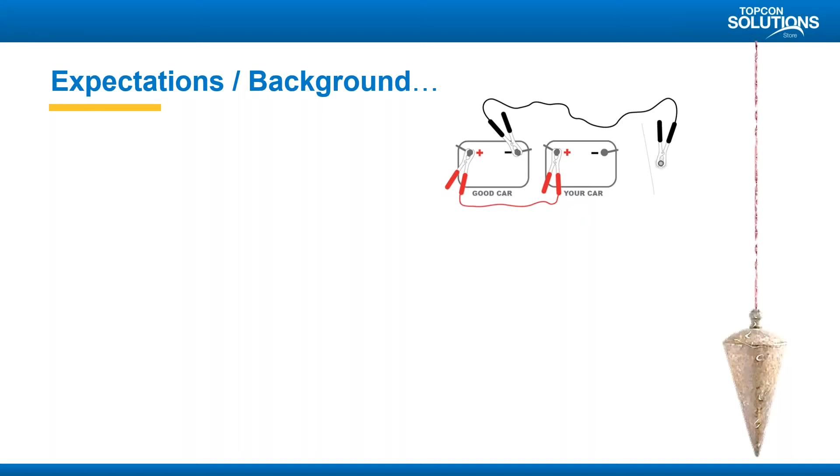Now, I set this up a little different, this whole Jumpstart series concept. I want to give a little background and some expectations on what we're going to be trying to achieve today. And right off the bat, why this Jumpstart series?

The main thing is, time is money, right? And a lot of folks that I speak with, they just don't have the time to sit in a class for 2, 3 days, whatever it may be, and they're really just trying to get some core settings in place to, I don't know, just make Civil 3D more usable and repeatable. That's really the key.

And another part of this too is with this new strange world that we're working in, many of us are working from home, and a lot of folks, they're still staying busy, but they may have a little extra time here and there to get a few things in place for when they do finally get a chance to get back in the office. So what we're going to be talking about today, I think I named this one something to the effect of 'under the hood,' sort of key settings and whatnot.

Now, I wanted to maybe preface before we got too deep into all of this that one size truly doesn't fit all when it comes to styles and templates and everything that falls under that category. Realistically, I've gone everywhere and worked with tons and tons of different folks, and I'll see that sometimes I'll have a process or two that I've picked up from folks or whatever, and I'll show it off, but it may just not work for them for whatever reason.

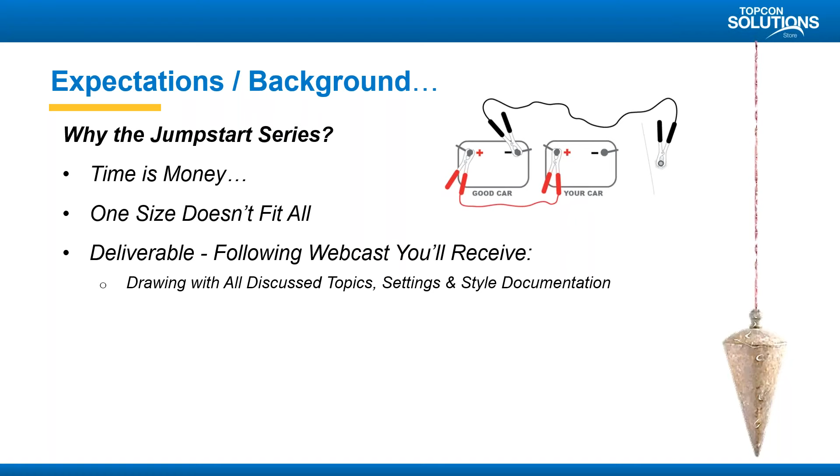You can kind of figure out what works best for you.

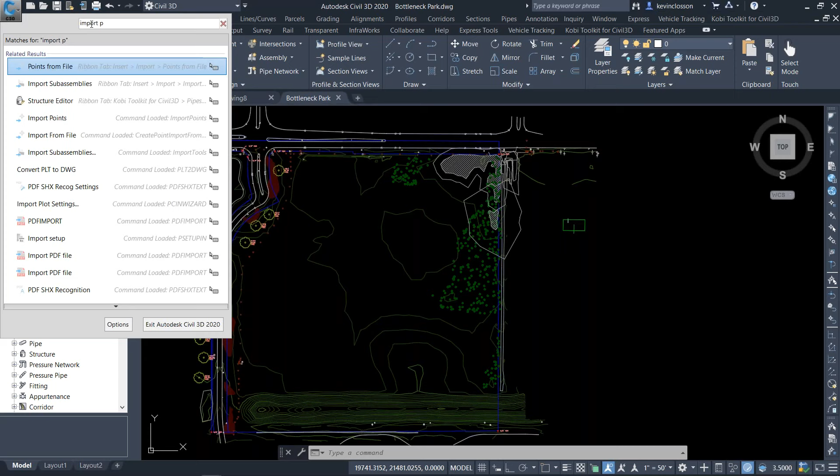But whatever that command may be - say you're trying to import points or something like that - you just start typing in 'import', and as soon as I go to 'points', lo and behold, there's Import Points.

So you can just direct access those commands. Kind of a nice little spot. Anyway, no big deal, I just thought I might hit that in passing.

Okay, so now what we're looking at is this one here, the quick access toolbar. And we use it all the time. That's where we open up a new drawing, save, undo, print, however you have it set up. But one thing I like to show with this is it's easily customizable.

In fact, I think this week I'll be working with somebody that had some old customizations, and we're going to decide whether or not they really want to migrate those customizations forward, because this slick little toolbar is so easy to customize.

And the second part is our ribbon, as you know, is context sensitive. So if you pick something, it serves up your next move. What I mean is if I click on that surface, it takes a second, but you'll see all of the next moves. The software behaves like a Word document. You pick on an image, there's a format for the image, or you pick on a piece of text or a table, and it changes around to the data associated with that.

So I say all that because I'm not seeing as much customization as I used to. And for those of you that do have a lot of customization, you know that sometimes bringing it forward or migrating it forward can create various scenarios that you end up having to repath things, what have you.

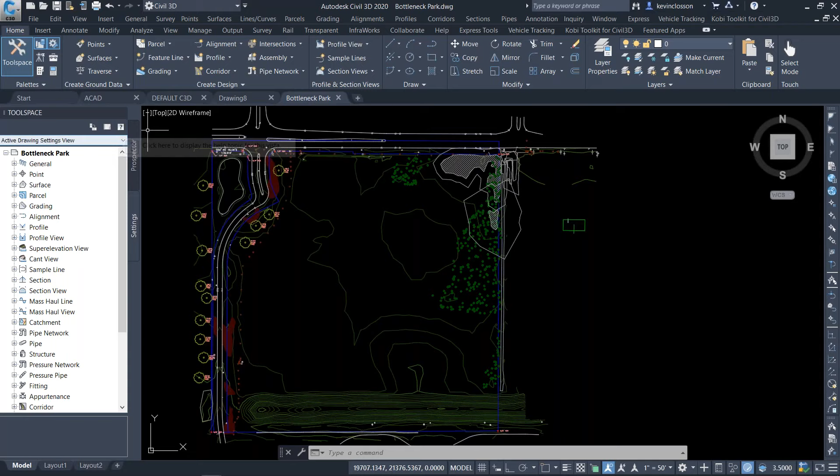So if I needed, a couple examples, a bearing and a distance, or information on an arc or something like that, if you're using the ribbon, that's where you would figure it out. Because I'm trying to analyze something, you'd switch to the Analyze tab, and then you'd slide over here and you'll see there's line arc information. Well, great, and you'd pick it, and it works fine.

But with this quick access toolbar, you can find any command that you need, and you can right-click on it, and the first option is add to the quick access toolbar, and it throws it right onto that toolbar. And I'll show you where we can make that stick too.

If I were to shut it down and come back in, or I were to crash or switch what they call workspaces, you may lose those settings. So there is a key setting in all of this. In fact, I'll point that out now, might as well.

This is our, if I drop that down, different workspaces. Looking through those, these are just default, there's 4 of them. Civil 3D, which is pretty much what we're always working in. Drafting and annotation is the AutoCAD portion, 2D AutoCAD. 3D modeling is three-dimensional AutoCAD, a little different drafting, more like parts, say on an engine. And then planning and analysis, that's the map portion, the GIS portion, Map 3D, that comes with Civil 3D. Now those are our workspaces.

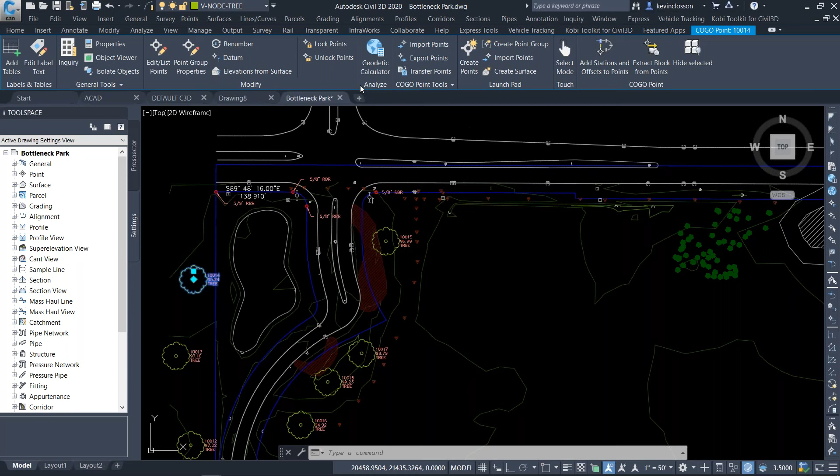So maybe a couple other quick things with this, just to be thorough. If I drop down that far right arrow pointing south, you'll see there's workspace, so I could always turn this back on if I wanted it up there rather than the little gear thing down here. But there's a few other little quick settings I want to show off, especially if you're newer to the program, or just don't get a chance to touch it day in and day out.

Toward the bottom here, the second one from the bottom, this is where it says currently—because mine's not on, actually mine is too on, I forgot to turn that off, sorry. Mine says hide menu bar.

By default, it'll look like this, where I'm just seeing a ribbon, okay? But if I drop that little arrow down, this is what I was suggesting, if you wanted those drop downs, you could say show the menu bar. And there we go, you can see file, edit, view, and so forth.

Now, the reason why I show that is, for those of you that just don't touch it day in and day out, I think it gives you a really good working relationship with the program. You don't have to jump to the ribbon to know where everything's at all the time.

An example would be if I'm just trying to simply insert points, well, I have to know that I've got to go to my ribbon, and then there's points from a file. And a couple different ways to do it too—you can use the survey database, and that's a whole nother ball of wax. We'll be doing that next session. But that's very doable, okay.

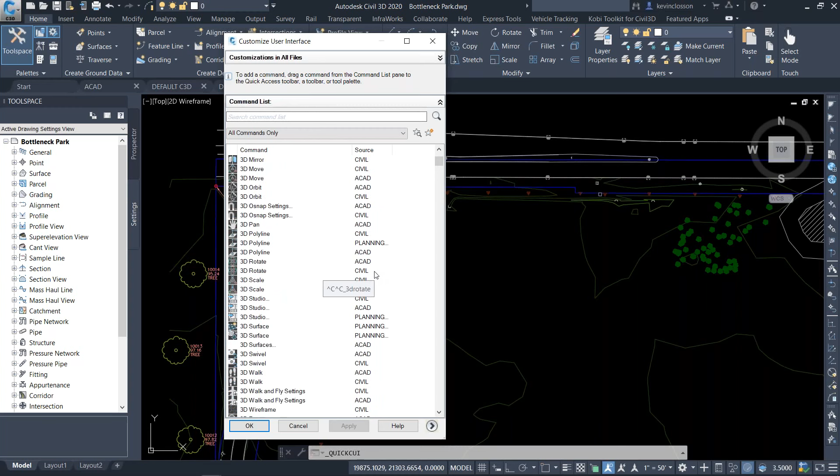This is every command within the program, whether it's civil, AutoCAD, map related, planning and analysis, and so forth, organized in that second column. Fortunately they are organized alphabetically, so you can go pick those. I'm just going to randomly grab something here.

Here's 3D Polyline—I wouldn't grab this one, but just since I'm looking at it, what you do is click and hold with your left mouse button, keeping my finger on that button, and you can see how the cursor looks kind of funky, like a little box with a plus. I can actually take that and place it anywhere I want, so maybe I'll put it right here for whatever reason.

You'll see now that by dragging that up, there it is, and it will stay there until I either get rid of it, or if I didn't have my workspace settings saved, next time I came in it would disappear. So maybe you have a job where you're doing areas, and you might find that area button and drag it onto the toolbar—just that day you're doing a lot of different areas, so it might be nice to have it readily available.

And now, when you already saw me do this, but if I don't want that, I'll discard that. If I don't want that, I can just right click on it and remove it from the quick access toolbar.

It really is bulletproof, customization-wise, throughout the years. I still run into it periodically where you'll come in one day and all of your toolbars or whatever they are - years ago it was smiley faces, then it became question marks - and you have to load one of the MNU files, repath a few things, and possibly the little pictures and everything else to get that information back. This thing you can add, remove, whatever it may be, all the time. So I'll dump that one.

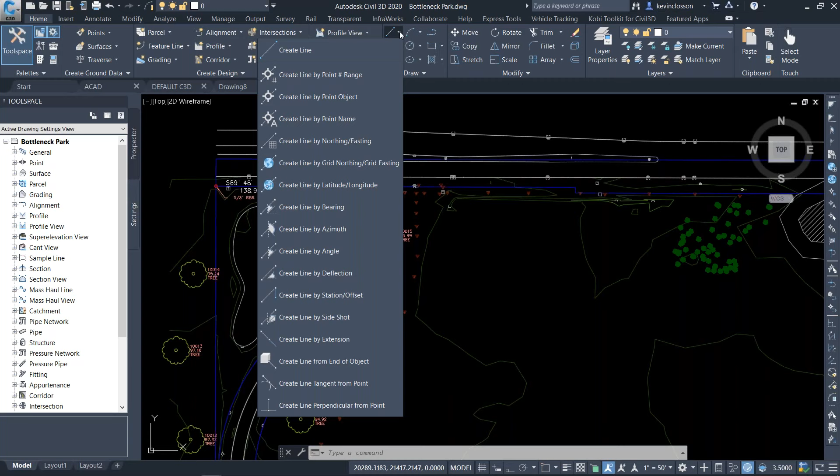These are all of the different AutoCAD lines - different ways to create lines, 3D, whatever they are. You can see the list there, a great big long drop down list. I'm just going to use that one as a default. I'd never add this one, but I think it shows what I'm trying to convey here. By simply clicking on it and selecting add to the quick access toolbar, there's that drop down list. If I click on it, they're all there regardless of what workspace I'm in - they'll always be right there.

Like I said, I've gone in and in the past set some default survey stuff up, like importing points, or just whatever commands folks didn't want to have to jump back and forth between different tabs on the ribbon to get to. You can compile whatever you want in that list, and that helps with additional real estate. At the end I can simply remove the quick access toolbar and poof, it's gone. But I will leave up that layer thing - that's one of probably my favorite things in the last 10 years that they've allowed us to do. It's quite useful.

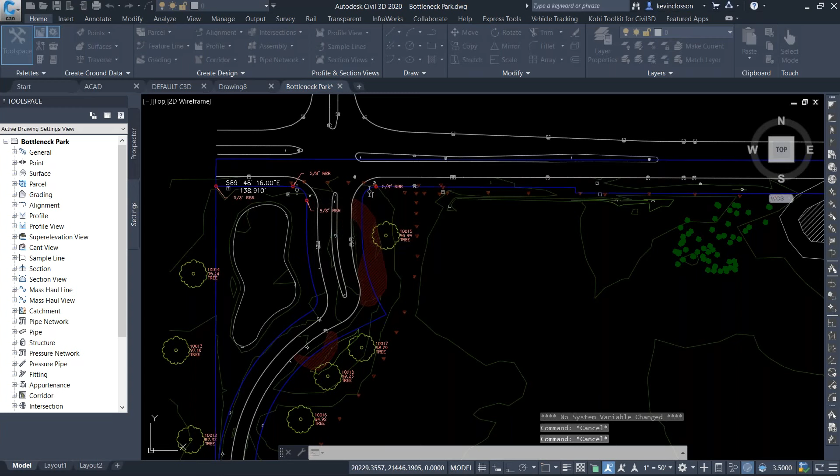Okay, so moving into the tasks at hand here. I'm going to get rid of that drawing for now. And I want to talk a little bit about template theory.

What I mean by that is, how do we want to run it? There are infinite ways that you can set your template up and behave with your day-to-day drafting or your outputs, whatever it may be. I'm contacted all the time to take a look at it, possibly overhaul a template, build it from scratch, whatever it is. I thought, as a point of reference, we'd backtrack a little bit and I'll give you a feel for what I look for. There's a couple of key settings that I look for, and that's what today is about - analyzing what you have currently and then making these changes.

I prefer to run the template lean and mean. I don't want a ton of layers. I really like automation, so if I go to create an entity, that's when the layers get created, and I'll show some examples of that. It really streamlines the process.

And the settings within those styles also allow us that holistic flexibility I was talking about, viewport to viewport - that's what we're talking about today. I don't want to make any of this complicated. None of this is rocket science - it's just a repetitive process. But knowing what you're looking for and how you want to run it, that's key.

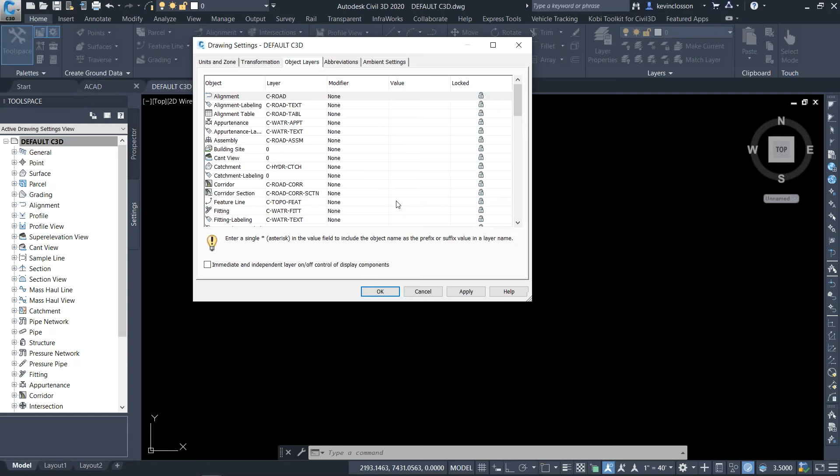But what I don't see are these things that we call modifiers. This is one spot that I look for. Now, I'm surely not trying to pat myself on the back by any means, I just grabbed this template.

Here's one that you'll be receiving here in just a bit. Drawing8, I just left it at that, we could save its name, whatever. And if I edit the drawing settings on this one, when I start seeing this is when I know that people are digging into their template and they're actually trying to streamline processes and just make the program as a whole easier to use.

You can see the same exact settings, but this is using National CAD standards, so the alignment is C-align, but where it differs from the last one is the suffix. And these are incredibly simple. You just click on it, drop it down, and you either change it to prefix, suffix, or as we've already seen prior, they were all set to none.

What that does is, with a suffix, you can then add in a value. If I stayed with the formatting in the National CAD standards, they're using C as the callout, which is C for civil, V for survey, and then it's utilizing a dash, and then it's just the actual entity itself. ALGN is for alignment, and then it's just a series of whatever your format is, dash, then 4 letters, 4 letters, 4 letters.

And for those of you that know me, I'm surely not a conformist by any means. The National CAD standards, even though it's got that spooky name, it's not an exact science, other than those first 2 callouts, the discipline and then the entity. After that, you could put whatever you want in there if you wanted to, but if you wanted to stay in the National CAD standards realm, you would say dash and then 4 letters, dash, 4 letters, dash, 4 letters.

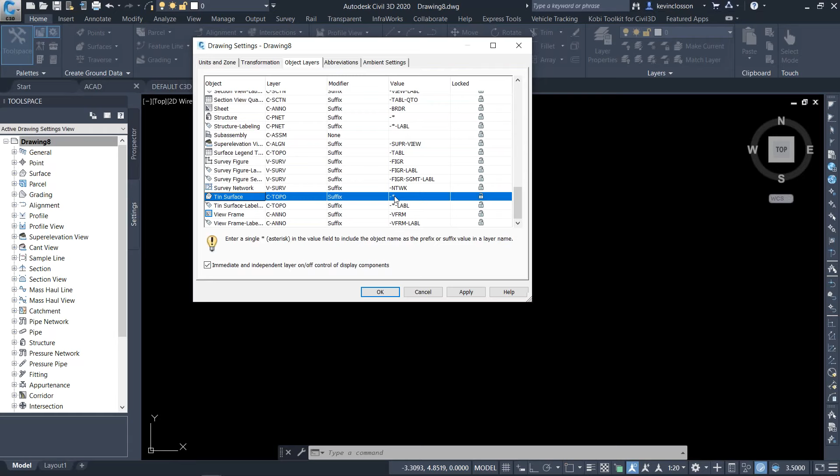There is no mapping that takes place, we don't have to do anything. Once we have this set up accordingly, if we created a surface and named that surface EG, that little dash in the wildcard or the asterisk will steal the name of the surface. So if we called it EG, we'd have a brand new layer automated at time of creation for that new surface - it would go C-topo-EG. If we created a pond and named that surface pond, it would go C-topo-pond. So it's being created as we go, in essence on the fly.

Now, a couple other things I look for, and I'll go back to this - the Civil 3D default template. Another thing I look for is layer counts.

So the default template, without drawing anything, has 212 layers. I think the other ones have 211 - I may have drawn something, I don't know. But that's not a ton of layers by any means. That is quite a few though.

It depends on if you have point styles in there and how you want to organize those - that's some of the stuff we'll be looking at later. But before we've drawn anything, this one has 212 layers. That's not horrendous by any means, but I've ran into some where I was reviewing templates, up in Alaska, and I ran into one that had almost 2,500 layers at startup without drawing a lick. Nothing was drawn. So they spent a bulk of their time chasing layers.

And there's different ways to organize that. You can have a secondary template and drag in layers via that design center we talked about. A good example might be a landscape architect who has a whole series of layers they use, but they're not really associated to Civil 3D - they're just AutoCAD layers, so to speak. So I'll often create a second drawing that we can drag those layers in with all those predefined output settings, line types, colors, and that kind of thing. I'll show that later when we're talking Design Center. But that's a great way to get layer counts down.

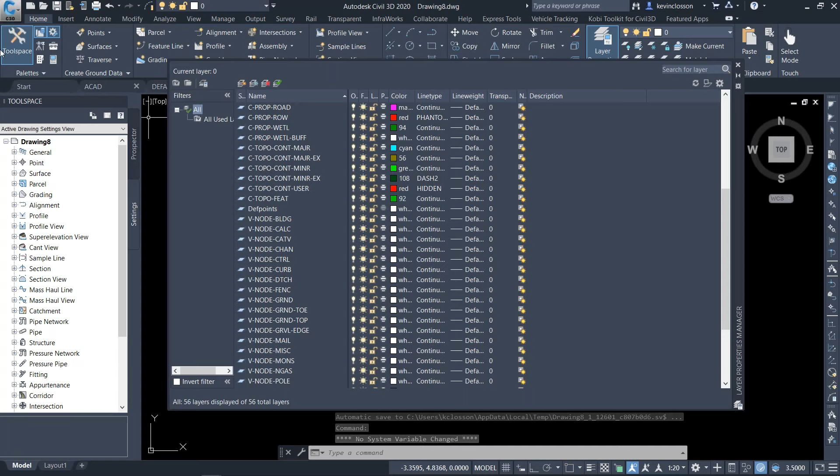Now, as I'm talking about all of these - thanks for hanging in there, this isn't the most exciting stuff - another thing I look at when reviewing these templates is what I often refer to as layer bloat, where there's several needless layers just by default. And like I said, one size doesn't fit all, so you may have a reason that you want to have it. But here's a good example where I shave a lot of layers down.

So if I go to the default Civil 3D template that comes with the program, I'll often show this one here, the surface style - here's surface styles. If I expand that out, I'll just grab any one of these randomly. This is contours 1 and 5, I think they call them design and background, something like that. So on the display tab, as you know, these are those sub-component layers, okay?

And at least these are flexible. You can see, for instance, here's major contours - they're on a layer that's predefined in the template, C topo major new, and whatever that colors to is kind of greenish, but that's set at that layer level. So at least that's a good thing - we do have some flexibility with it.

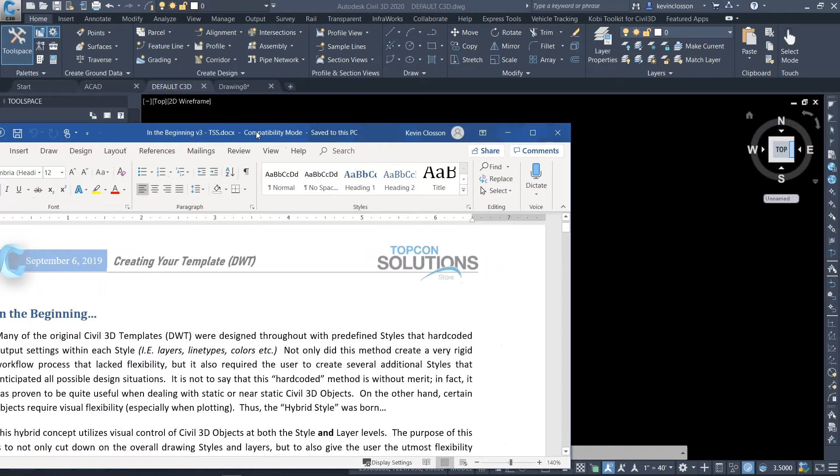So what do I mean by all of this? Let me pop up a document here, and I'm going to send this one on to you as well. I often make fun of myself with this—it is a little on the boring side. I was joking around here in the beginning.

Years ago I put this together for a firm. They had me build an incredibly elaborate template for them, and they were just getting up to speed in Civil 3D, and they didn't know how to use the template. They just hadn't had the experience with Civil 3D as a whole—they just didn't know how to use it. So I wrote this document up, and I homogenized it some so it sort of fits everybody. I've been threatening to change a word or two here, but not to bore you with it.

I give a little preface before I get too deep into this thing: basically there's 3 types of styles templates, and you see those bullet points there. I called it style controlled, object layer controlled, or a hybrid possibly of both.

Years ago now, when they handed us the box of Civil 3D and said install it, we're going to be using this one day, we were trying to do this thing called style controlled. This document has examples, and we'll get down there in a little bit. Here's style controlled—I'll show it, a little dialog box here. What it's saying is inside of here, you'll see there's line, curve, spiral. When that alignment gets drawn, it's going to automatically put those on a layer called C road center, in this case N for new. But it's hard coded here where it says color is green.

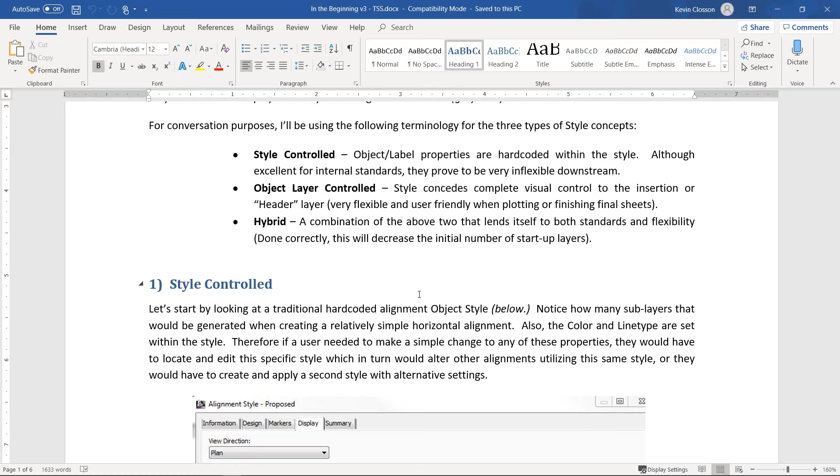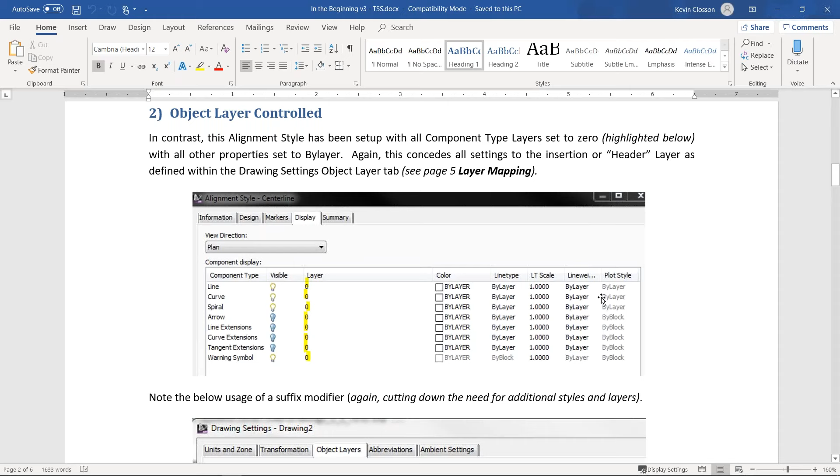You might not do it with an alignment, but I may show that. So that whole concept with that style controlled, it's excellent for maintaining standards, but flexibility becomes a problem. The next one down is object layer controlled. If I go down to this picture, this is looking at that same alignment. In this case, notice that everything is set to 0. So with those layers mapped accordingly, one of the first things I go look at in the drawing settings under object layers, if I create an alignment, this one is going to go C-align, and then the suffix is being utilized with that dash and an asterisk. So if we were to call this main road, the layer will get created C-align main. Now, if there's a con to this, it'll initially come in white, but because of these settings up here, all I'd have to do...

Uh-oh, it looks like maybe we lost Kevin's audio. Audio connection restored. Good, there we go. All right, Kevin's back. How long was I gone? Oh, a good 30 seconds or better.

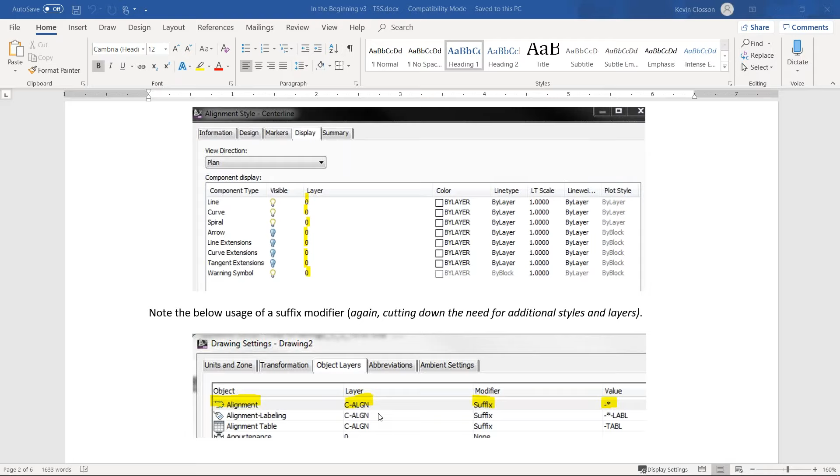Quickly, what I was just saying is those settings down here are going to automatically work because we have the automation of layers. By default, I create a new alignment, name it main road or something like that, and it'll go C-align main. I just would go to that layer and change it there. Where this is a game changer on the pipes side of things is I can have all my pipes do this as well. Instead of having tons and tons of layers within my pipes, if they're all set to 0, it'll automatically go to whatever I call that pipe run or pipe network. If I call it storm, it would say something like C-pnet pipe network dash storm or sewer or whatever it is. So it's this really easy way to manipulate that data after the fact.

And then the last one, and I'll put this in motion for us here, is the hybrid, which over the years we started kind of playing with. There are some layers that you're going to want in your styles template. I mentioned surfaces - I always want to have existing surface contours and proposed surface contours, I want layers to represent those from the start. That way, if I come to work for you tomorrow and you say build these surfaces, all I have to do is apply your style and it's always going to plot, and we have that consistency. However, because it gets its style or output from the layer itself, since everything is set to by layer, we can do whatever we want with it.

So, fair enough. Now there's a neat thing, and you'll receive this too, and I'll put that into motion, and as we start playing with the points, I'm going to come back to this to hopefully solidify what I'm talking about. So in this drawing here, this is the template, if you will, that I'm going to send out to you. And quick point of reference here, I'll do something like this.

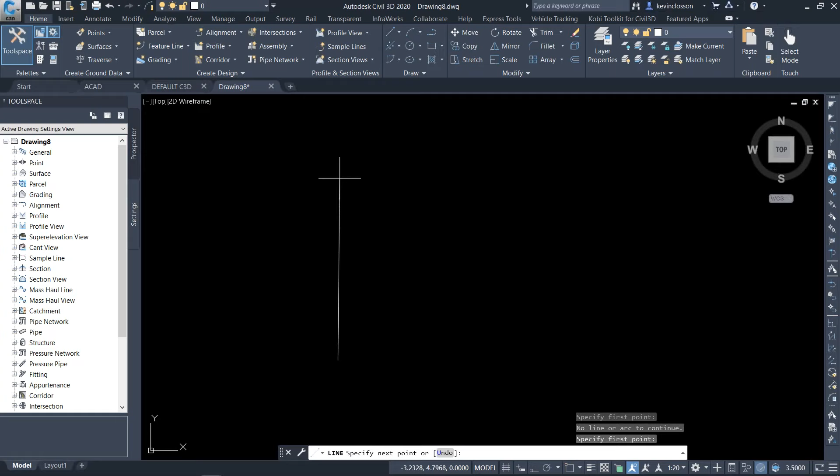Quick zoom extents here. I think I'll move that so we're not in negative values.

Fair enough. All right, different ways I can create this. Maybe I'll scoot over here a little bit. I just needed some kind of feel for what we were looking at here. So I'm using alignments, but this could be pipe networks, or whatever it may be. And when we looked at the layers, I think we roughly said there was 56 of them in here, something like that. Now, if I go to alignment and say alignment creation tools, I'll just create a quick alignment, and use that example I was talking about earlier, and say this is like the main road or something like that.

Center line, fair enough, doesn't matter with any of this. And then the alignment styles, if I drop this down, there's one in particular that I'm talking about. I do have, for the record, existing and proposed inside here. So when I initially put this template together, it was for a firm that had some folks that some were better users than others, and so they wanted a foolproof method. If this was a proposed alignment, we could pick proposed, and we sort of did. We hard coded those. In fact, let me grab that proposed one for a second and peek inside of it so you can see what I'm talking about.

So in this case, we still left the layers zeroed out, okay? But in their case, they needed the color always to be blue. We didn't mess with the line types. We said that could still be adjusted via the layer itself. So this was just, like I said, sort of a foolproof way. If somebody drew an alignment, it would always be blue. However, when we create this, it's going to call it C-align-

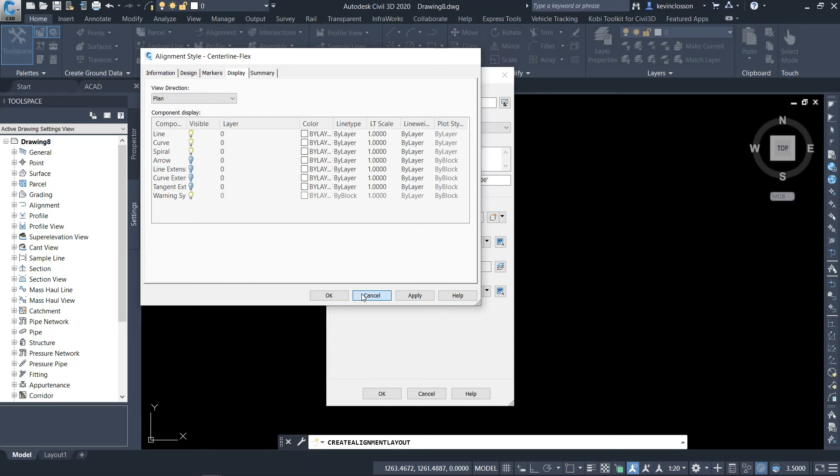main, the name of the road. Now this other one that I use throughout the program for various reasons, I started referring to it as flex, for flexible. And if we took a quick peek inside of that one, notice that everything's still zeroed out. Colors are by layer, line types are by layer, and so forth. So I'm going to just use that one, and then I'll quickly draw this thing out, whatever the labels are, and say okay to this. And as you know, we'll just say, I don't know, tangents, no curves. I'll just throw something in here real quick.

Now, if there's a drawback to this method, whether it be alignments, pipes, or different things like that, notice that it does come in all white, okay? And this is just a default setting. That's just a font that's using this a little bit more bold. Now if it's a one-time setting, you would have to have your team - and I'm not saying you have to do it this way by any means. This is just a method that a lot of people like.

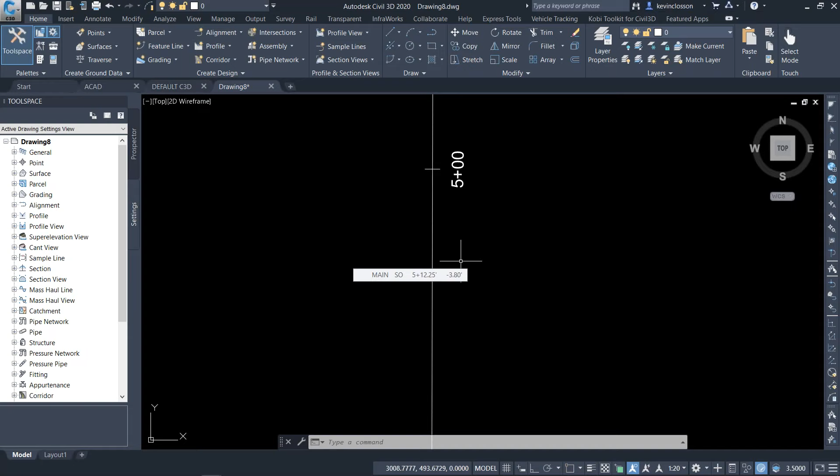Okay, I just wanted you to see this option, and it really lends itself to some of the other things we're going to do. So if this is a method and you have a team that's diligent enough to make sure that their proposed alignments are a certain color and line types and so forth, that's where we can go into our layers. And in this case, this didn't exist. So that's due to the automation, C-align-main. Perfect. So that was created.

Now there's a secondary piece here that we discovered as well. Notice directly underneath it, and I'll go back to that setting and show it off. Actually, I think I can use this here, drag this over here for a second. So here's sort of this byproduct that we discovered as well, or another little feature. Under that alignment, there's those settings back in the drawing settings, and this is a one-time deal. Obviously, we want this built into your template, so you don't always have to do this.

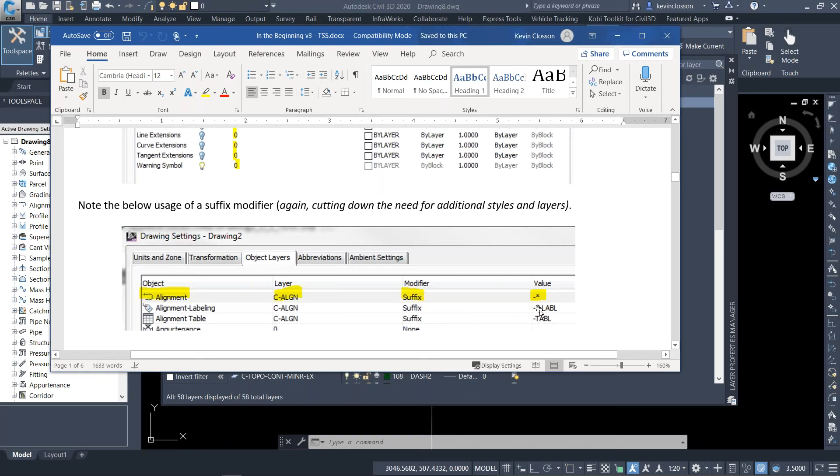But directly underneath it, where it says alignment labeling, that's also C-align. There's a suffix there. We utilize the suffix, and then what we did is we put a dash, an asterisk, dash, and then the National CAD Standard label. So the label's on layer 02, and what it does - well, as it gets created, but due to the insertion layer - so I'll start here with the main road. I don't know, pick your color, whatever your poison is here. I'll say yellow, and maybe I'll say the line type is center line.

So if I move this out of the way, you'll see that it now has that center line type and it's yellow, one-time setting, okay? Now I mentioned byproduct. Here's the real byproduct I wanted to show, is both of those got created as I created it. This is huge in pipe networks, but it also groups my alignments together.

I mentioned that template that had 2,400, not styles, but layers in it. They'd have to go way up to the top for their alignments, and then two-thirds of the way down to try to find the appropriate labels for it. And they were chasing layers all the time. These are all grouped nicely together.

So just to be obnoxious here, to change the color, I'll change that label to magenta. And if I get rid of that for a second, you'll see that now we have a yellow line type.

Now I don't want to oversell this though. Obviously you'd have to have a team that could adhere to standards. If, and you know who you are, if there's some folks that are kind of doing everything on their own, this might not be the best technique.

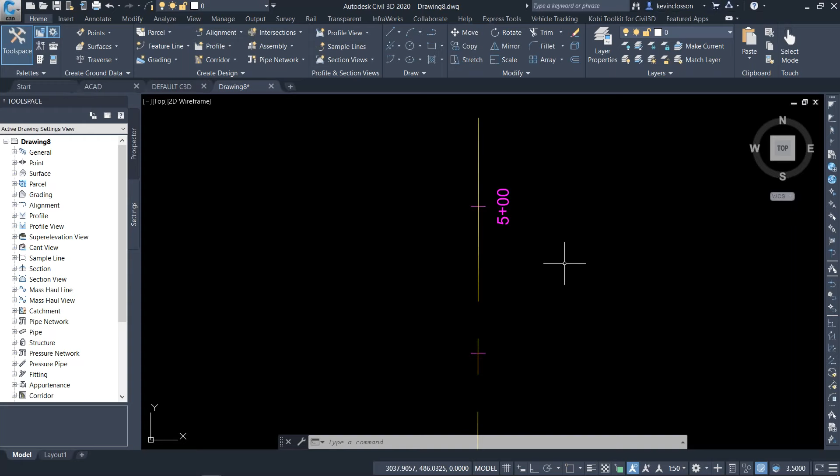Now the reason why I show this briefly, and I don't have anything set up in here, I'll kind of mock another one in here. I'll say alignment creation tool, same thing, and maybe this is the side road. And I'll slide on down here and I'll use that same style. I'll say that centerline flex, same labels, whatever.

And we'll pretend that this does something like a T intersection or something like that. And I'll just kind of rough it in, whatever, just close. And again, it starts its life in kind of a generic state. There's a couple other little tweaks we could do to it. We could have a line type automatically, though the line type is probably not going to change. But I love this aspect of it, that everything is grouped together.

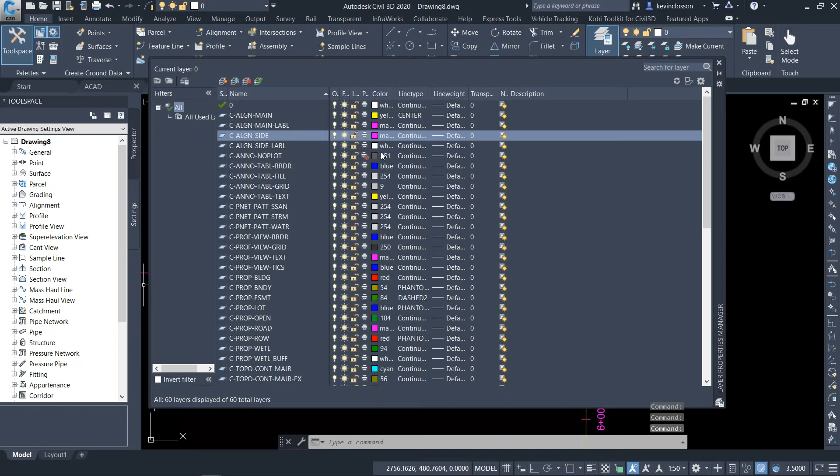So there's that alignment, that's the second one. I'll just change it to something different, this is the side road. I'll just make that magenta for kicks. I'm not concerned about the text, that's all just style stuff.

Now the reason why I'm promoting this, I guess, is, and here's where I don't really have anything set up. This is just a layout here. And if I were to throw in a couple viewports or something like that, I'll just copy that over.

You shouldn't copy those. Yeah, it doesn't matter.

All right, so I'll go into this one, I'll do like a zoom extents. And now with styles, and this is where you get into whatever the style may be, we can set the overall text height of the style regardless of the scale.

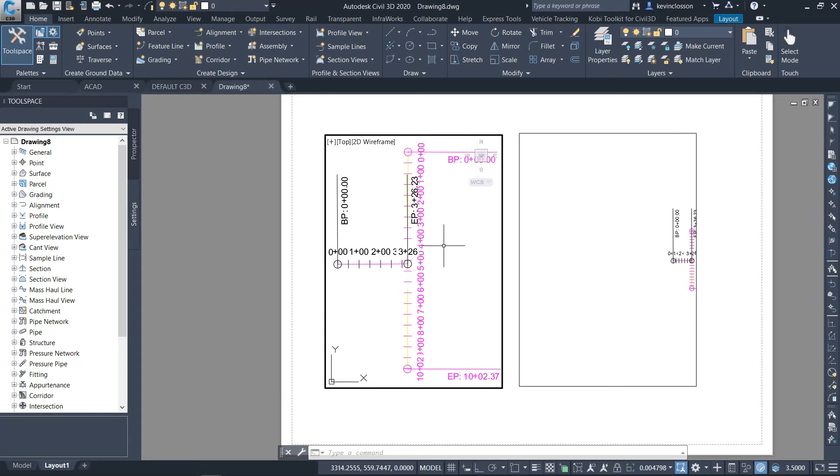This again, I don't have anything set up for this. So if I'm inside that viewport, I'm actually in model space and I can zoom in and it appears that everything's getting gigantic, and it is, it's just zooming in. But if I regen it, just do a quick REA, all that text is going to go down to its normal size. And I believe, if I'm not mistaken, that is 0.10 text height.

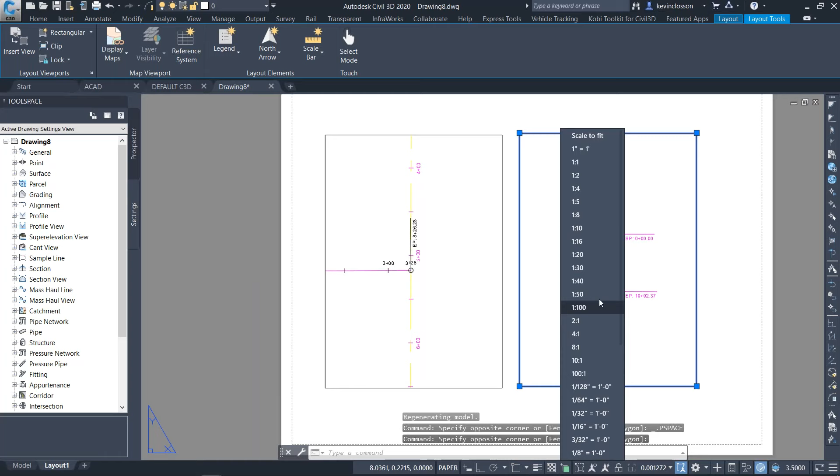So that was just a random scale, maybe we're zooming in on an intersection. If I go into this one, and I'll have to test it, I just drew that out of the blue. If I select it, maybe we want this one to be, let's see what 1 to 50 looks like. Oh, a little too much.

How about we'll say, we'll go 1 to 20. Oop, I went the wrong way. 1 to 100.

Now that one, regardless of my paper space scale, that doesn't matter. I can go inside this thing, move it, and then regen it. And due to styles, it automatically sets the text height, again, whatever I plot this at, the viewports are going to dictate the text height, whether it be a point or an alignment or a label on a surface, whatever, okay?

Now lastly, and here's where I'm going with all this, I'm trying to, this long drawn out process here, I'm trying to show the flexibility, right?

So inside of here, if I hover over that, you can see that they are linked. It's the same alignment. But being that I'm in the secondary one here, I can go into the layer properties, and I'll move this out of the way so we can see what we're talking about here.

I'm going to change that side road, which is currently, here's the side road. The global setting is magenta. Now I'm using an alignment. You may not do it here, but I think it's easy to understand what I'm talking about utilizing alignments. But if this was a pipe network or whatever it may be, surfaces, specific details within a surface, a major contour, who knows.

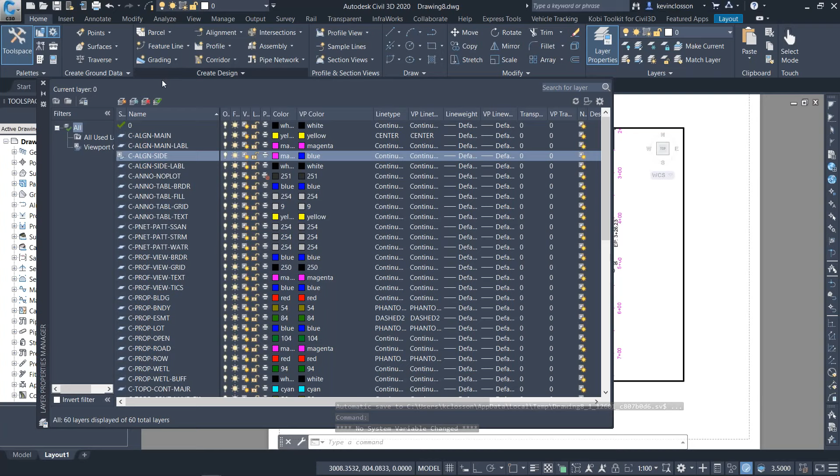And if we look at that, now you can see that, let me get out of it so I can zoom in a bit. There it goes. I don't know if you can quite make that out, but that's blue, still the same thing. And if I go back to my model space, it didn't change it. So anywhere that was in the drawing, it's only changing it in that viewport. And that's because we gave control to that layer, okay.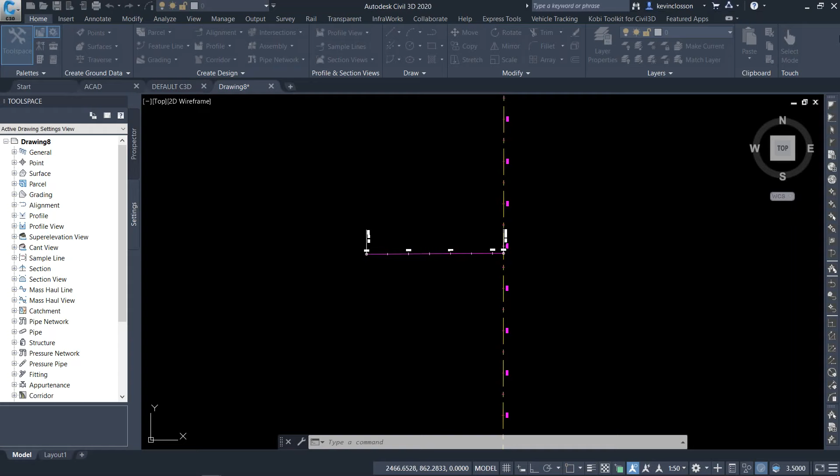So a couple more things, and let's start talking points. And forgive me, I'm just going to use one of my current drawings that we'll often use in class here.

And this one I just called description key, okay, the drawing itself. And what's inside of this is what we want to make sure that we have in place on your template. There's going to be a few things, okay. So on my settings tab, if I slide on down to points and I take a look at these description key sets, and this is an old file.

I love getting a chance to use it. So anytime I can pull it out, it makes me happy. This is one of the old Autodesk files that goes way, way back. You've probably seen it, and I left it as Portsmouth.

And if I just kind of do a quick tally of what's inside this drawing, if I right click on that and go into edit keys on this, I kept it really, really simple on purpose for, I guess, sort of a classroom or conveying the message. This is a real job back east, and this is just the description key file, okay.

And when we take a look at the drawing I'm going to send you, I've sort of homogenized it and made it a little bit easier to see, because everyone's raw descriptions, the description they record in the field, that's going to be different from drawing to drawing, firm to firm, agency to agency. So we'll take a look at that.

In this case, this is a very rural setting out there, and they got ground shots, iron pins. They don't have a lot because it's raw land. It was a subdivision that went in. So I just created a key for POW.

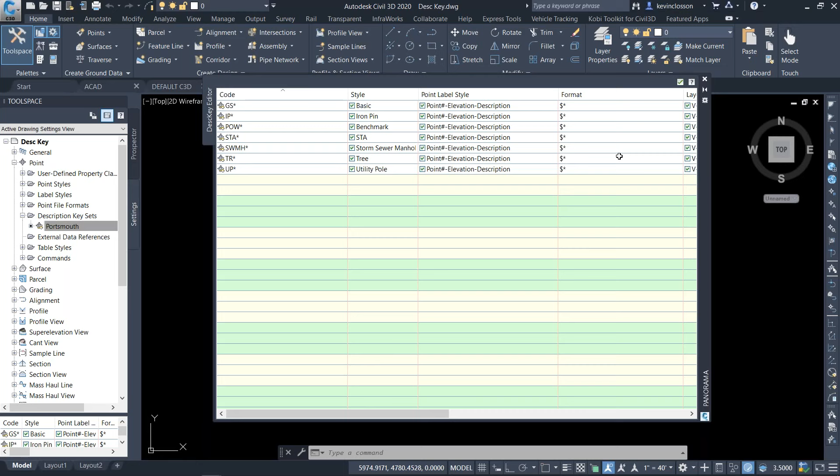The $ asterisk is nothing more than code that says steal whatever you punched in the data collector and in the field. Data collection systems have changed a bit too though. In the past we used to have to enter in numbers or codes. Now a lot of times it's done via dropdown. So if you were manually entering in, say you found an iron pin and you typed in IP, that little asterisk right next to it, all it cares about is when it sees IP as the prefix. Then you could go space and put in an LS number or whatever you wanted to do. And that $ asterisk is going to automatically say okay, perfect, iron pin is found, and then the raw description or format, it'll change the raw description to say IP space and then give you that LS number or found disturbed or whatever you happen to punch in manually in the field.

The point style dictates the symbol, okay? And we're gonna see that here in a little bit. So I'm gonna cancel that for a second. I just wanted you to know up front, I did build this in. My guess is a huge percentage of you are gonna have this part in place, some form of description key file. If it's not consistent, or well, it has to be consistent, but if it's not thorough or all in place, get a hold of us. We can help you out one way or another to further your list or whatever it may be.

Now in the prospector is where we do our work, right? We all know that. And I have a few point groups pre-created, so I'm talking about a couple things at the same time. The all points point group is always there. When you bring in points, that's automatically gonna go to the drawing's database, okay? And I have one in here called no display, and I think I'm gonna do this right from scratch. So I'm gonna take that and sort of convey the message all in one.

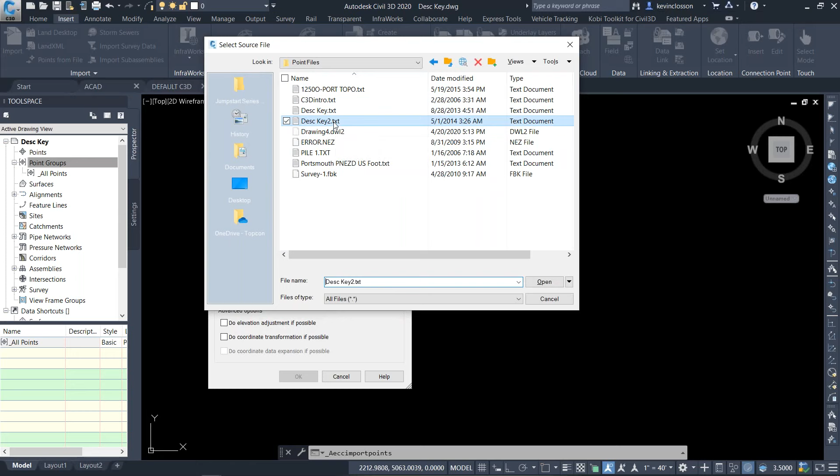I'm just gonna go to my insert tab here, points from a file, and you'll recognize this, top to bottom on this thing. So if I hit the plus sign, plus always means go out and grab something, right? So I'm going to go to my point file that I set up for this, and I'll say all files. In this list, there's one in here called description key 2. Now, one thing about this, I purposely set this up or left it in Autodesk's format. That way we can kind of see pros and cons to it, and then we'll make edits to it going forward. These are the key usability settings that I'm referring to, okay?

Now, as a side note, I can right click on this while I'm in the command. Who knows, maybe you're working with a consultant and they send you a point file, I'm not exactly sure what's in it. I can right click on it and open it on the fly. And we can see it's got a point number - this we'd have to do a little research on - it's a northing and easting, it's the zenith or elevation, and then the raw descriptions. And it's broken up by commas. In this case, this is comma delimited rather than space delimited, okay? So just as a side note.

So we know that is referred to as PNEZD: point number, northing, easting, zenith or elevation, and finally a description. Okay, great. So I'll just highlight that and that'll make a link to it. And then the program does its best to guess what that format is. It may not know if it's easting, northing, or northing and easting, so we just have to tell it which one it is, PNEZD. And it gives me a quick little visual down here, okay? So far so good. And when I okay this, all these points come in. Does that look familiar?

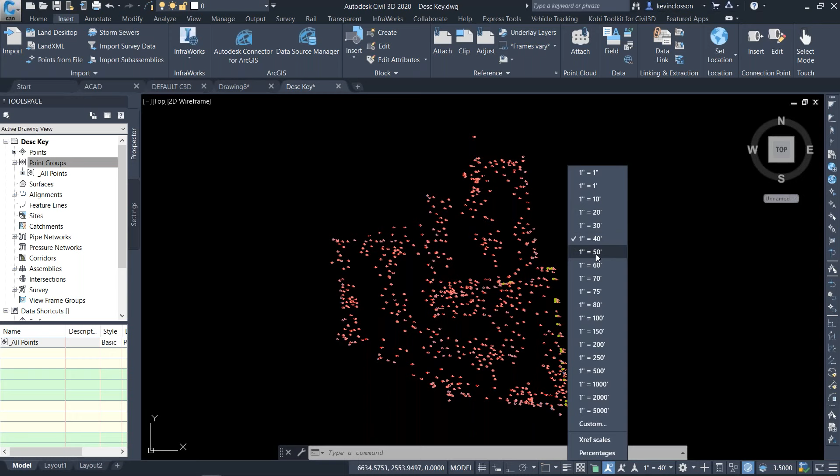What I'm looking for is symbols. Did they come in? And in fact, there's that tree symbol, this is just their defaults. Forgive me, because there was a lot of points on a wall, I just put a benchmark symbol in there for conversation purposes. You'll see them all over the place. And there's survey stations and utility poles and whatever else is in here.

Okay, and we'll create one together, and I want you to see these key components, right? So what it did is it ran its way through, let's take a quick peek at that.

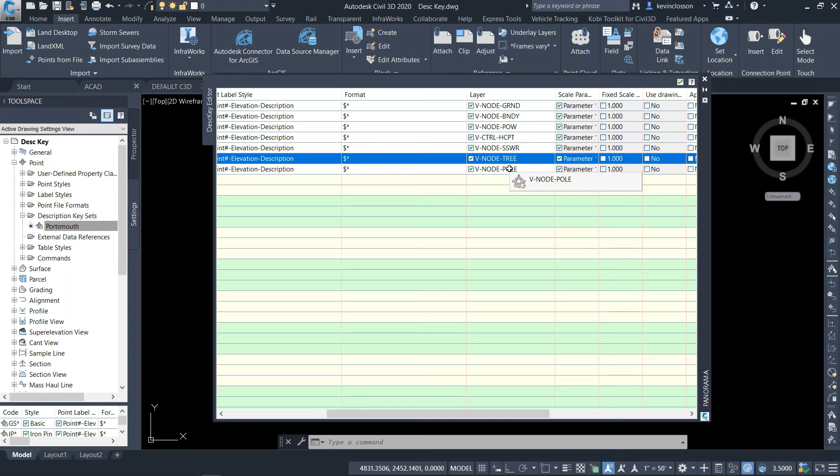Going back through, I'm speaking of the trees, for instance. So I'm going to say edit the keys, I just right-clicked on the name of the description key file. Now if I go down here, this is just the way they were gathering the data. There's a TR for tree, and the point style is set to tree. We're going to dive into one of those here in a little bit. And label style, of course, is just default point number, elevation, and description. And then there's that format. It also automatically created a layer for me when that came in. So now that should be on V-NODE-TREE, okay?

And then because that dollar asterisk, if we go look at it, it'll probably spell it out. I think they actually punched in TREE in the data collector, but the little wildcard just looks for that TR. So it all should be well.

So here's where I'm going with all of this: it looks like they probably shot a tree that had a wire on it, maybe a boundary or some sort of fence or emulating a fence, who knows. So, all right, fair enough. We can see that we got its point number, elevation, and that description. So that came in okay.

But here's the example I like to use. There could be several different reasons, but if I pick it up front, just right off the bat, because of my settings, this is where stuff starts wrapping back around, it's telling me V-NODE-TREE. So that worked out, showing off that quick access toolbar. Cool, that makes life a little bit easier for us. I can hit escape on that.

And so far so good. However, it's common where you'll have a drawing, maybe you've had to go out, survey it, and you're preparing maps, whatever, and then at some point somebody says, okay, maybe it's in an intersection, and they say these trees, some of these are going to have to be removed for site purposes at this updated intersection. So you may go back into the drawing, and we might create a layer called tree removal, and give it some kind of grayscaled color or something like that. I'm going somewhere with this.

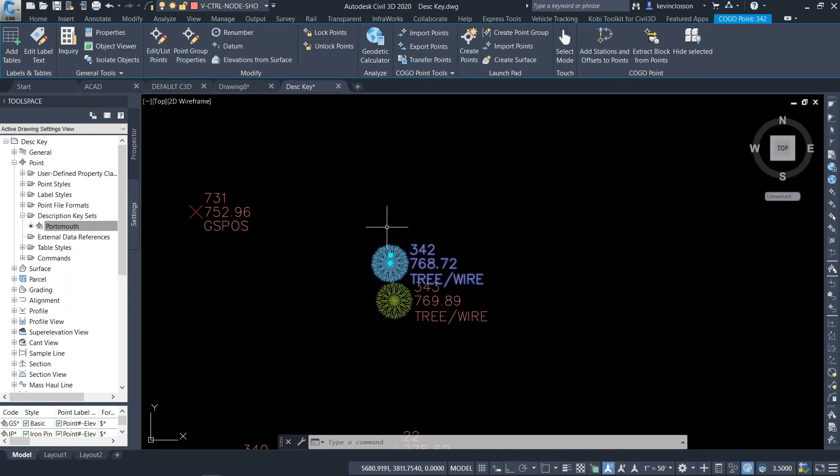This is, and I see this more often than not, and this is the big reason why we're here today, that you just old-fashioned usability, okay? So what's actually happening is, if we go look at that style, the point style in this case, which is tree, okay, and if I switch to my settings tab for a second, we go locate under points, because it has something to do with a point, I'll go to my point styles, and lo and behold, somewhere in there is tree. And if I look inside that, you can double click on it or right click on it, whatever, and that'll pull up our editor.

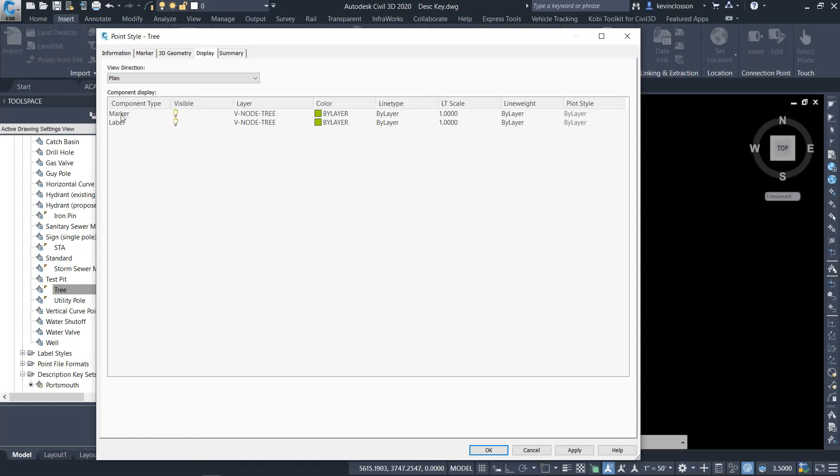And the first thing I'm going to look for, I'm going to switch to my display tab. Now in this case, it's kind of a double setting that's happening, and I see this one all the time. Not that it's wrong, you may prefer to work with it like this. But the marker is, as it got created, it says go to the V-NODE-TREE. So this is taking precedence, saying the output of this tree is set by this layer. So if we looked at that layer, it's remembering its origin. So even though it switched to a new layer, it's still getting its output properties from the original point style.

So these are things that we would want to change going in. There's just a handful of simple things that we would change. And that's what we're going to do here in just a moment. We're going to create one so you can see how that plays out.

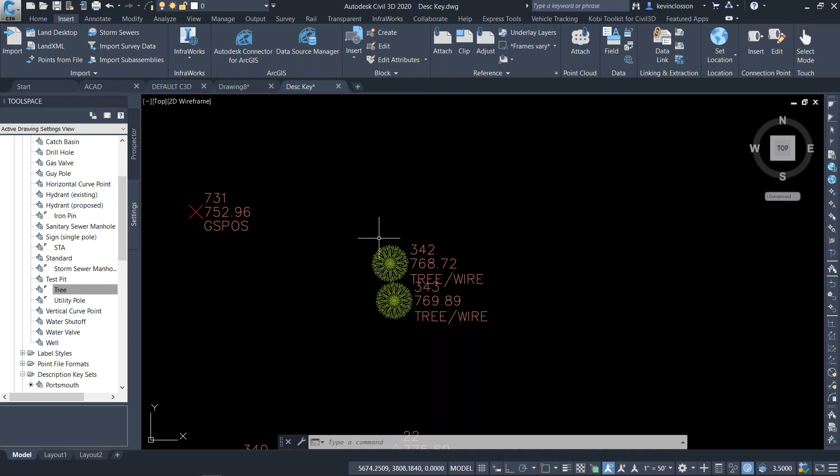Okay, in fact, let's go ahead and do that now. Might as well. So I'm going to create a different one here that should work a bit better. I added a bunch of points to this file called shrubs. There's one right there, and we'll build it how I would suggest to build it. It's a suggestion here, but this is what I see out in the industry that's working really well. And then we'll talk about visualization, how to control it.

So I'm going to do it more manual. We could work right in the description key file, but I think this will help on your end, where you can go into this and just basically find where these locations and settings are.

So I'm going to do this. I'm going to go to my settings tab. We're going to create this one called shrub. And by the way, there happens to be one in Autodesk's template. It's called bush or something like that, BSH 5 foot, which I get a kick out of in its own right. It's suggesting that every bush they ever find is exactly 5 feet, regardless of your scale.

So whatever. But I always tell everybody, when you're creating something, especially a new style, find something close. Don't worry if it's not exact by any means, just find something relatively close. That'll allow you to go in and make edits to key locations rather than having to reinvent the world for everything, okay? So what I'm going to do then is I'm going to right click on this one and copy it.

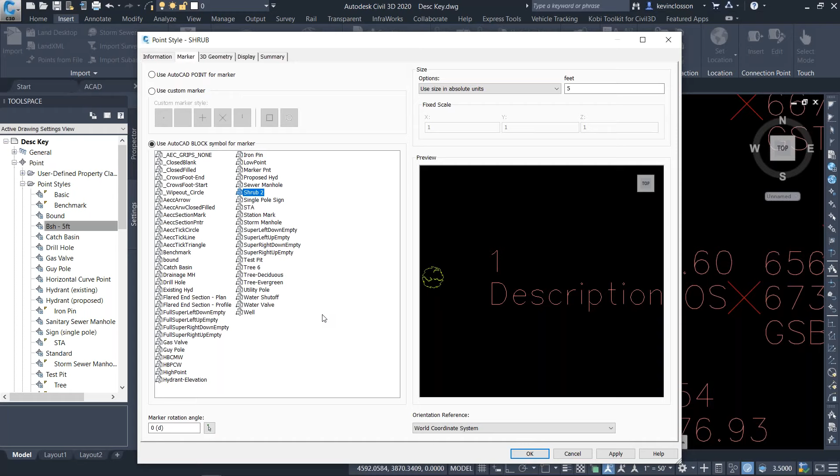A block definition - you can erase it and that definition will still be in this list. But if you're doing it on the fly and need to browse out and find a block, you can just right click and there's a browse option. If I hit browse, it'll let me browse to any location where I may have a survey symbol.

So you're always working in this area, and you'll see shrub 2 is selected, but if I hit the one above it, there's a manhole or survey station. I'll go back to that shrub. These are just the listed block definitions in the current drawing. You can always add to it so they'll show up in this dialog box to make this easier.

So we copied it, we set information, we renamed it, the markers are where we get our symbol. In the upper right, this is where we size the block, and there's 4 of them.

One of them you can kind of throw out - I'm always trying to boil things down and make it easy. The one that says relative to screen on the bottom there, you can pretty much throw that out. I forget which ratio it uses, but I think it's like 10% of the overall screen size or something like that.

Which basically means if you zoom in on a bunch of points, the points get smaller and smaller, which is great for playing connect the dots. But it's terrible when you zoom out because then all the points get gigantic and cross over each other. So that one rarely, if ever, gets used.

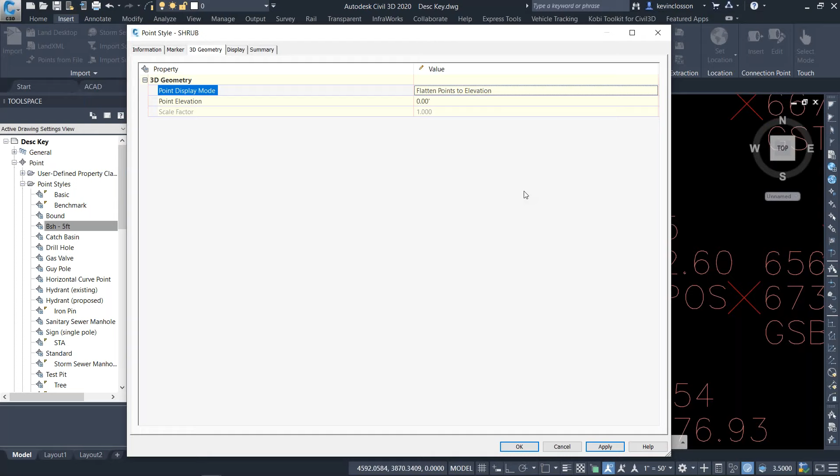Now, to resolve the tree problem we were talking about when I switched the trees over to a different layer, but they still retain the green output setting, that's handled under the display tab here. Currently I copied the shrub one, and it's using this one called V-NODE-TREE. This is where it starts wrapping around further. I'm going to pick the top setting and the bottom setting at the same time with the shift button, and then I'm going to hit where it says V-NODE-TREE.

And surprisingly, this may feel awkward, I'm going to set that to 0. Color is by layer, line type is by layer, and so forth.

Now, just to be thorough, that's plan view. But if you were to bring it into an orbit, notice that layer still exists, so I would just click on that again and hit 0. If I pulled these points into, say, a profile, they're still on that layer, so I may set that to 0 as well. Then you wouldn't have to do all these, but there's a cross section too. I do the same thing.

Now, the reason why I did that is because in a moment we're going to create the description key style that's going to give it its layer. We don't need two different places telling this to go to a shrub layer, that's what the description key file does. So I'm going to put that into motion, okay?

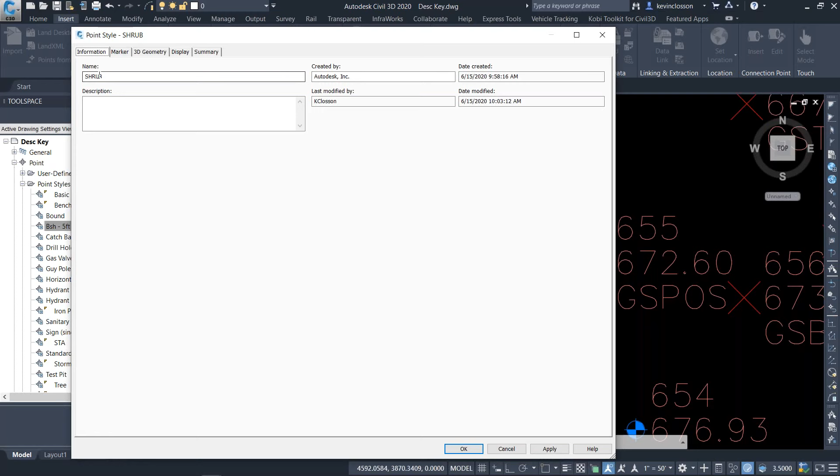A quick review of these key settings. This is why I wanted you here today, the information tab. We copied it and renamed it. Marker - we're using the pre-existing one, or you can right click and browse, okay? But there's really only three main things: 3D geometry, and flatten points to elevation.

If you happen to go through your list, this is a side note, and I've spent countless hours doing this. I've built styles where they've had 300 different point locations, styles, or raw descriptions in the field. We had to create all these different point styles. It can take a while where you just have to keep going through these, finding these three settings, and then changing the layers. Once you have one created though, you can copy it, and that makes it much easier.

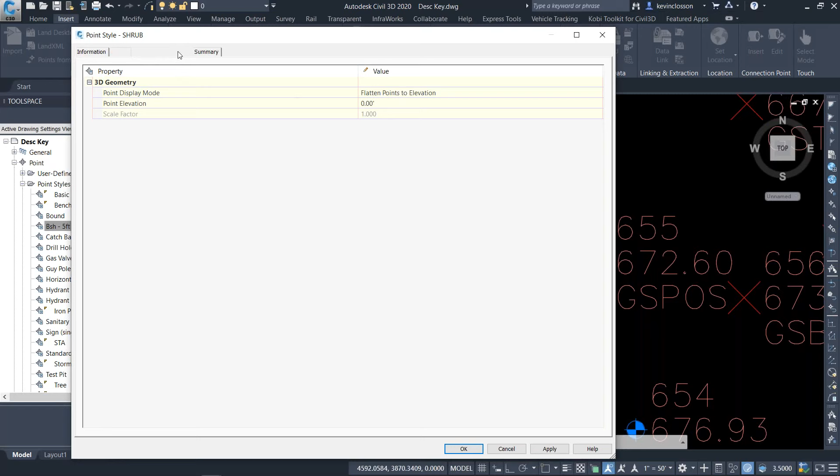But again, we went to 3D geometry, we flattened them to 0. The software knows its true elevation. And in the display, we changed it to layer 0, sized it, flattened to 0, 0 layer. Now what that's going to do, let's put that into motion.

Nothing happened yet. I'm going to add a key to this before we play with a couple of the display things here. We're doing good.

All right, so now I'm going to go to that description key file. So the settings tab makes sense, has something to do with a point. There's description key sets, and there's the one that I'm using, the Portsmouth. If I right click on it and edit those keys, here's the current keys. Now I will say this, Civil 3D uses the panorama, that's what we're looking at here. And it's not bad, it's just kind of an Excel spreadsheet vibe.

But Land Desktop had a nice wizard, and this can get a little tricky, and that's another reason why I left them very small like this - just a short list. If you said new key, often it resorts and you got to go find it, so there's a couple methods. For those of you who've built these, you know exactly what I'm talking about. But as a whole, it's simple.

So the code, that's the raw description in the field. So I'm going to do this - I'm just going to simply right click and say new. And that's what I was talking about, see how it's sorted? Now if I had 250 of these, I'd have to go find that.

What you can do is, if you have a like column, you can just - like these are all dollar asterisk - in fact, I'll click on this, and now it's going to sort via this column. And if I right click and say new, see how it just placed it at the bottom. So that's a nice little trick.

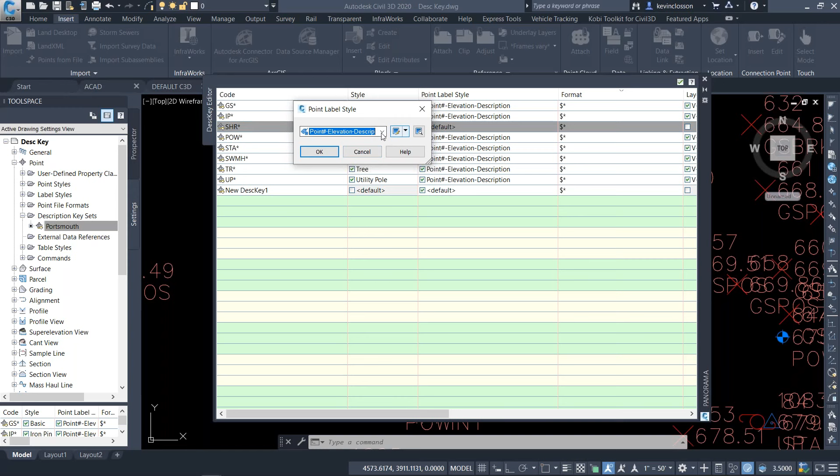Fair enough. The point label style, these are actually two in the same: point number, elevation, and description, the default. But I'll click on it to be consistent here, and make them all point, elevation, and description. As a side note, I rarely see folks create a point label style that's like 45 degrees, just so when they're looking at it visually they can tell that it's a key point for whatever reason. Just you can do, and we can change them all later.

Format, I'll leave that, so it's going to actually steal the entire word shrub, or I could even punch in and spell it out and say it's a shrub, whatever I want to do. So now this should be in place, okay? And I'll just close it. There's no saving, and those shrubs have not been activated yet. So if I did edits where I was changing elevations or something like that, we could re-import the points, but if I had those edits, it would overwrite those edits.

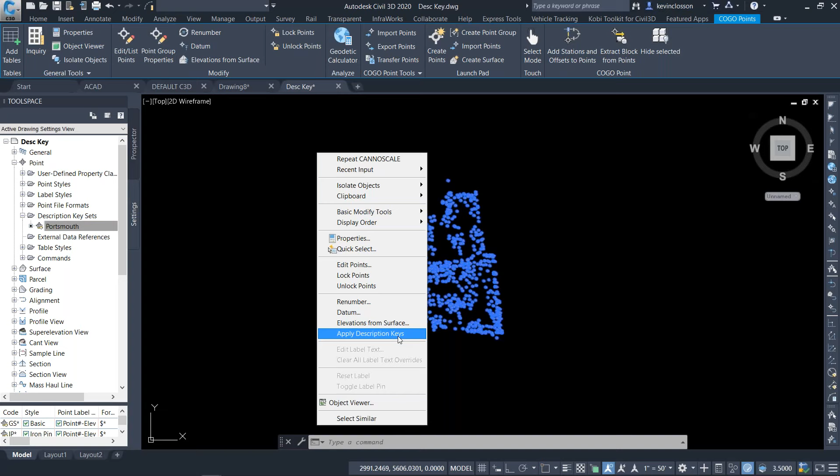So a really cool trick is, in this case, I'll just zoom way out and grab all of my points just with a crossing window. And I know some of you love this, the lasso. So I'll grab them all, and you can actually pull this right off the ribbon. But I'm going to right click, and say okay, great, what do I want to do? About two-thirds of the way down, there's apply description keys.

And just like that, edits and all, if I zoom in, we can see that those shrubs came in. They're at that 0.125 height. Perfect. Now, the tree was a problem. Let's say we wanted to get rid of some of these shrubs or just change them up. If I pick any one of them, just like that, great, and I want that to be on a different layer.

Oh, interesting. Oh, you know what I did, my bad here. Let me do one other thing - I forgot to add my layer. So I'm going to go back into that description keys and edit those keys. Okay, and then I'm going to slide back over. I just got ahead of myself here, thinking about my next step.

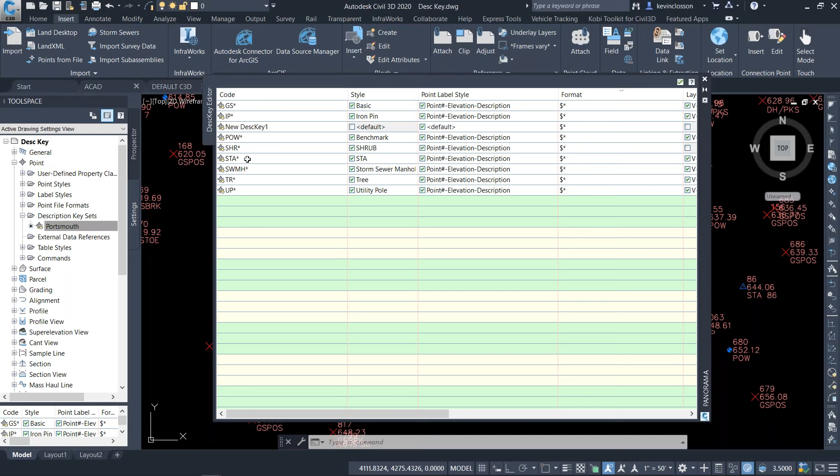So there's that shrub. I'll locate it in my list. Did I not save it? Oh yeah, there it is, I was looking for the full thing. So there's SHR. This is where I stopped early, the layer.

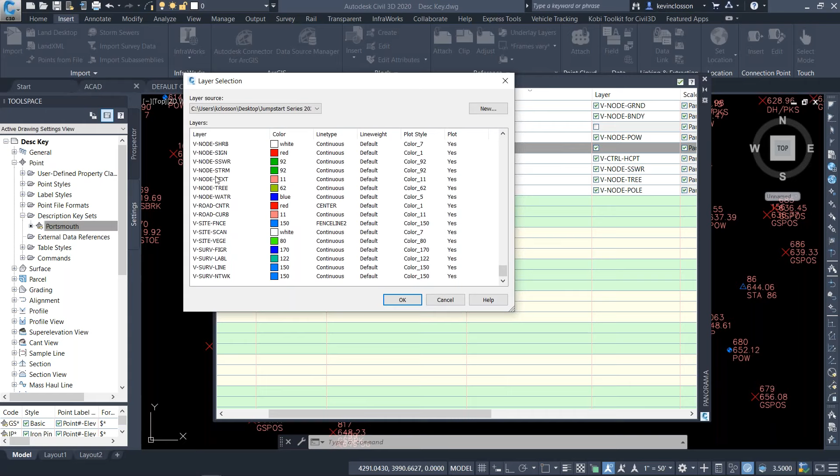I needed that to be on a layer. So I'll pick the little checkbox, and I believe I already created a layer. I'll just pick my little empty spot - you click on it and it pops this up. I could create a new layer on the fly, or we'll just find, I think I built one in here. In fact, I know I did. It's V-NODE-SHRB for shrub.

Okay, so that's what's going to dictate the layer. I can close that and just grab those again, and apply the description keys. Let's see if that changes - I might have to erase them. We'll see.

Nope, we're good. All right, so you can see that there's that vnode shrub, right? Well, in this case, because of those presets we did, the description key is just applying the appropriate block in that. We're letting the description key file dictate the layer.

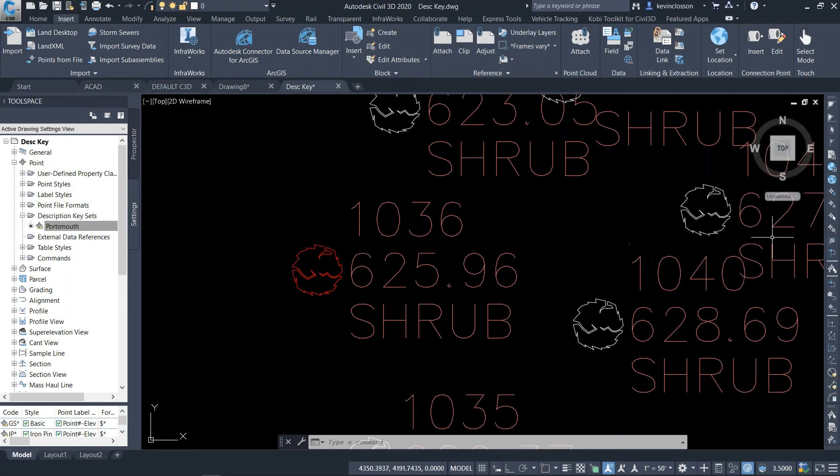And I'll randomly drop this down and just grab, I don't know, whatever - I'll grab this wrong layer. You wouldn't do this, obviously. But if I hit escape now, see how that updated. So that could have been that if we had that tree removal layer, that would have gone to that, and it would be some color that would allow us to either plot it more bold or just the opposite. If I select it, just like that tree, it did go to that other layer, but unlike the tree, this shrub inherited the properties of it. So very, very important.

Okay, couple more things. All right, so now display. This is a big one. This I'm seeing more and more. This is a mature program, it's been around for a long time, so I'm actually seeing this usage quite a bit. But there's one little nuance to it.

It's like if we just want symbols only. Okay, so I'm gonna keep it real simple up front. These are styles that we want built, or not styles, but point groups that we want built into your drawing right up front or into your template. And I purposely don't have them in there because I wanted to build them with you. Okay, so what it would entail...

Is under point groups - I switched to my prospector here. And the drawing that I give you will have this. If you were to click on point groups and say new, a point group is just like its namesake - it's a grouping of points. One point can be in as many point groups as you want. And we often use them to organize, to date when points were possibly gathered, for display purposes, surface building, and on and on.

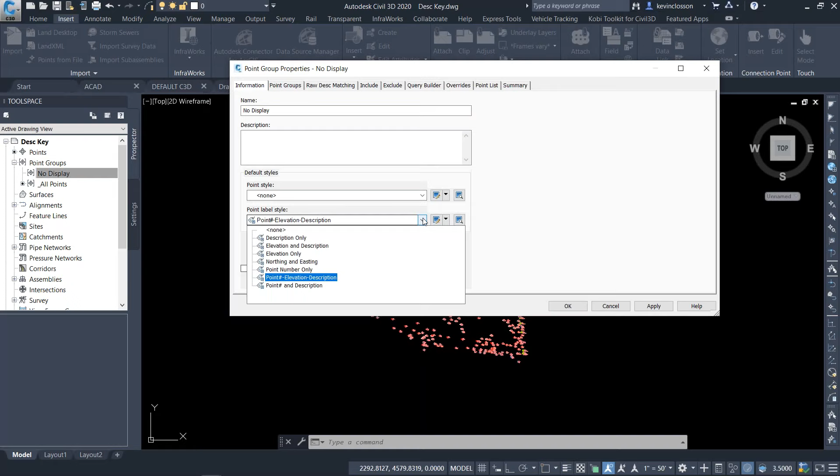Check, check. Then I'm going to go to the include tab, and the purpose of this style is to globally turn off every point in the drawing with just a quick pick and click. So I'm going to say, just like the all points, include all points. Perfect, that's turned on, and now I'm trying to give you a little visual here.

So watch what happens here. Looking back, when I apply this, I'm expecting to see every point turned off. So if I hit apply, do you see, there was only a handful of them that did turn off. This is a key component to this, and it's a one-time setting.

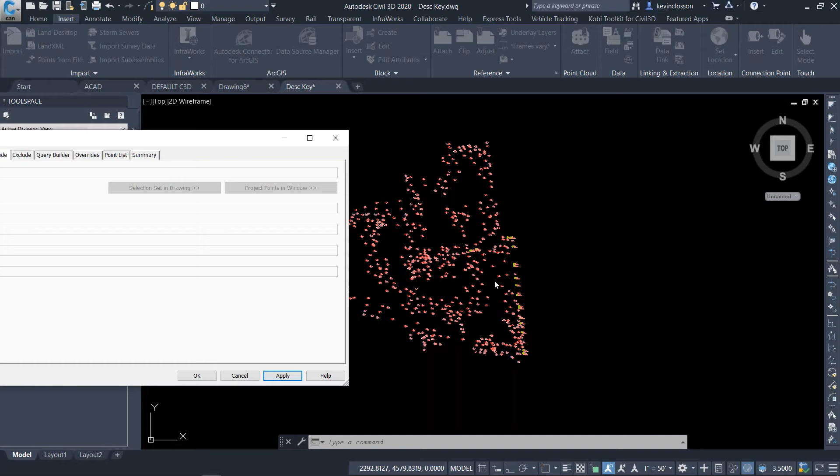What happened is, when it comes to points and hierarchy, the top of the food chain is the description key file. It dictates its layers, its blocks, and everything else. So what happened is those points that turned off, for whatever reason, were random points or error points that I mis-entered, and they didn't get picked up by that description key file. The rest of these were all in the description key file. So when I was expecting this to turn everything off, it didn't, because again, the description key file is in charge.

So what I would do then, just to prove it here, is go to my point list. This is just saying which points made it in, and if I scan down here, it's every single point in the drawing. We're just not getting the output information back, none and none.

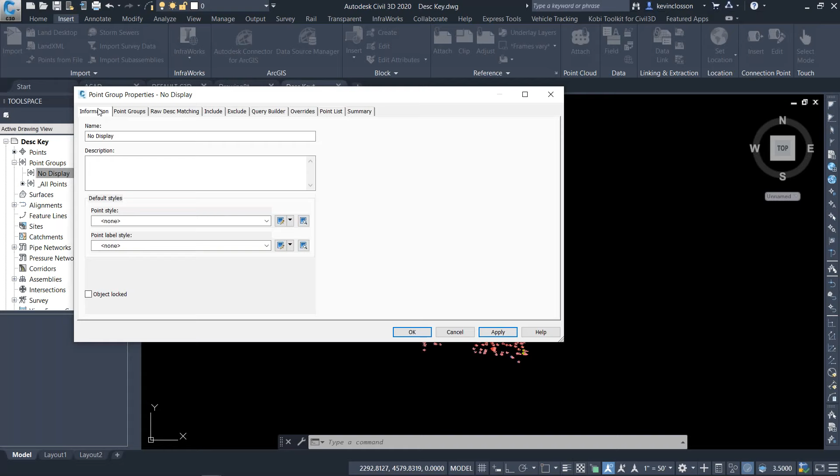So what I need to do is override the description key file. And lo and behold, there's a tab there called override. Now, once this is set, you never have to do it again. This isn't something you have to remember all the time.

So under overrides, I'm going to say turn off the point style, trees, catch basins, on and on, to none. Same thing with the point label style, override it to none. And when we OK this, everything turns off.

Great. Why it turned off is hierarchy, that's what they call this. The hierarchy, currently point for point, these two point groups are identical. The no display and the all points point group are identical, point for point. But the no display one's on top.

Once all of your information is in here, I can simply right click on point groups and go to properties. I did this at the top layer, by the way. I right clicked on point groups, not these down here, that would be editing the point groups at the very top.

And this lets me change my hierarchy around. I can say take all points, and you can either do them individually or just shoot it to the top. I only have 2 right now. And when I OK that, they should all come back on.

Great. Now, here's where these point groups become incredibly powerful. There are 2 last things with this, knowing how this works, overriding the description key file. That's a key component to this.

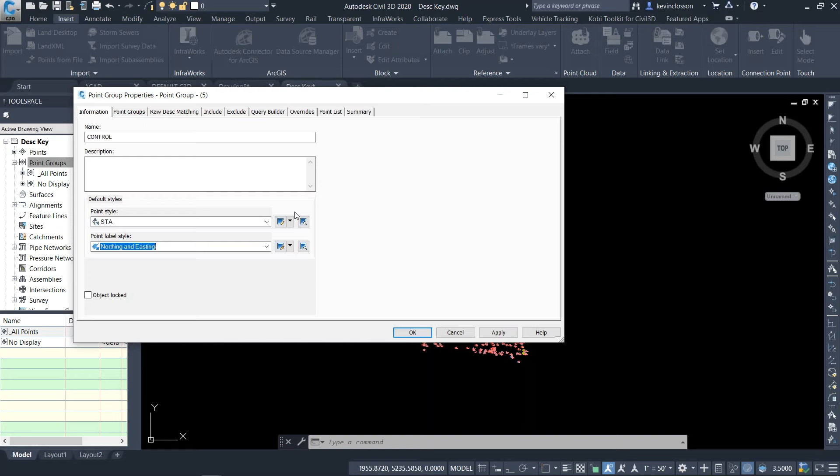Then I can say include. Last time what we did is just a global include all points, but this is an isolated one.

This is for survey stations. The way these were gathered in the field was STA1, STA2, STA3 - station 1, station 2, station 3 for the survey control. Those were the raw descriptions. Knowing that, and you'd have to know your point file, with raw descriptions matching down here, and it is case sensitive, so I'll make it uppercase STA - this has been around forever, so most of you already know where I'm probably going with this. I can just put that asterisk, and it doesn't care if it's 1, 2, 3, up through 100, whatever.

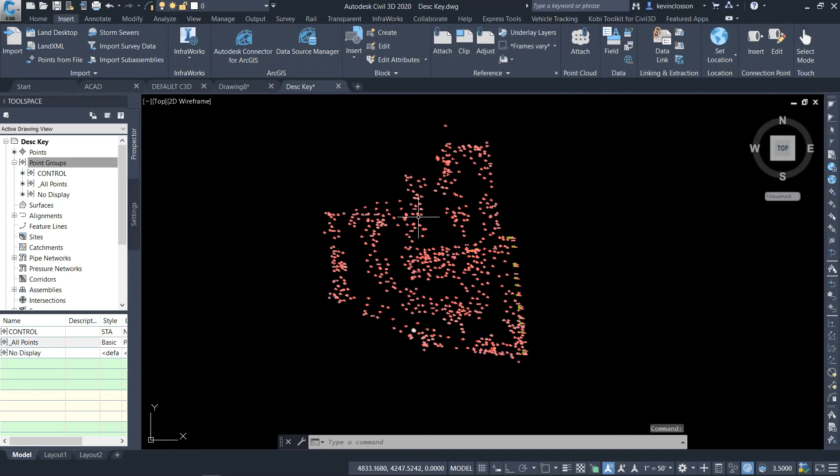Just STA, and that takes care of it for us. Now if I want these to show up correctly under my overrides, the style is the same - I change it to a survey station, so I really don't have to change that. The description key file has the exact same setting. But if I want it to show as a northing and easting, I have to toggle that on. Check, and I'll say OK. If we zoom in somewhere and find a survey station, there's one with that block, and that just has that northing and easting.

Here's that whole idea though, isolation-wise, via point groups. I look over here - here's my point groups. What I'll do is I want to only see the control points. Some of you are probably asking, well, could I just isolate the layer? Yeah, probably, but this is a really nice way where we can grab several things at once. If I right-click on point groups and go to properties, remember that's the hierarchy setting. If I look down this list, the last one I created is on top - that's the control.

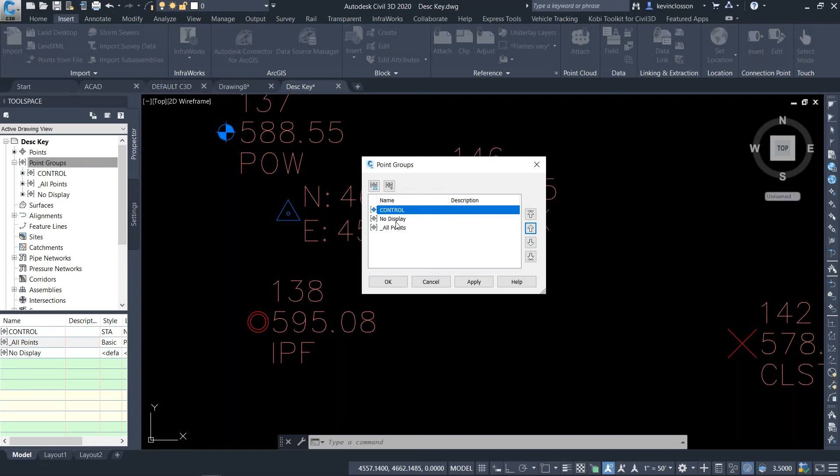These control points are in both of these point groups underneath it, but because it's being read first and its output properties tell it to look like this, that's why it's showing, because it's on top. But if I want to shut everything else off except that, I'll just take that no display and shoot it directly underneath control. So it'll read the control points, output is expected, then every other point that gets picked up in no display, which already accounts for the rest of them, everything will be turned off except our survey stations.

This is great because I'm not fighting layers. If I want them all back, I just go to point groups, right click, properties, say all points, shoot it up to the top, and everything comes back to where we started. Okay, so very, very nice - that's point group visualization.

The last one I wanted to do on this, before we start talking about saving back to templates - I'm a couple minutes long, so forgive me here. We're not doing too bad though. So the last thing I want to do with this is the one that has kept surveyors for a long time from not using the program.

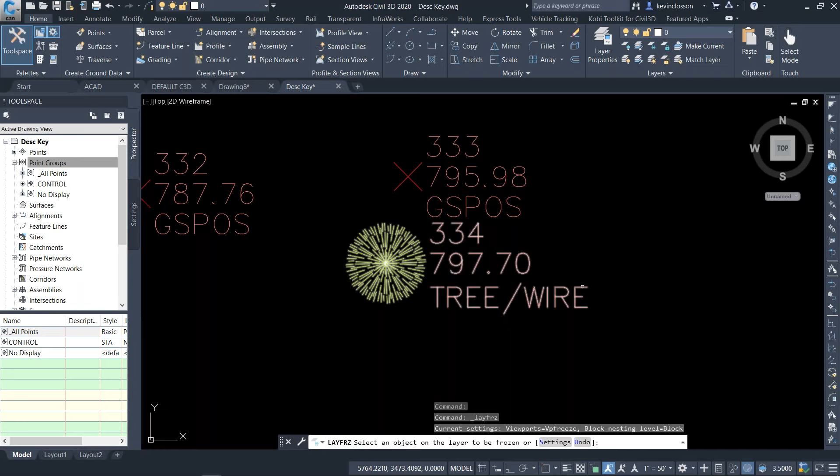If I'll just use one of these trees again - end of the day, I'm just trying to plot my trees. But you know, it makes sense, it's how we always did it. We would use like a freeze command - there's freeze. It gives me a little freeze, and I'm expecting to just freeze the text, and you know what happens here - the whole darn thing turns off. The whole thing is an object.

Okay, so I'm going to undo that - that didn't work. I've seen all kinds of creative things - people create all these different point groups, I've seen different types of layers built into the description keys. But if you do this right, it's pretty slick.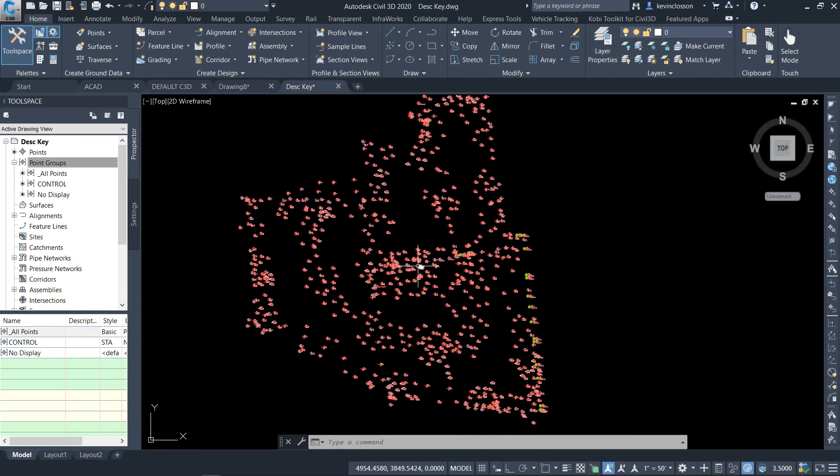This would be the third point group I would have pre-built into your template, and I always call it symbols only. I'm going to right click on point groups and say new, and it pops up like this. This would always be there, so I'll just abbreviate a little bit - sym only. Now, obviously, this is going to require consistency throughout - you have to make sure your teams are going out and gathering data the same way. Otherwise, all this is useless. So we'll suggest that that's working.

This symbol only - what we're going to do is utilize that same technique where we overwrote the description key file. So down below, the point style, I don't care what it is, because the description key file will take care of that, whether it's a tree, shrub, benchmark, monument, survey station - that takes care of the actual block itself.

The label style, though, I want to set that to none. Now, when I'm saying consistency, and they did make this easy, and I kept our numbers real simple here and make it easy, the list.

The include tab, you could go through these and you'd have to look through, pretty common, at least 150 different descriptions that are recorded in the field. You could go into each one of these and type IP, comma,

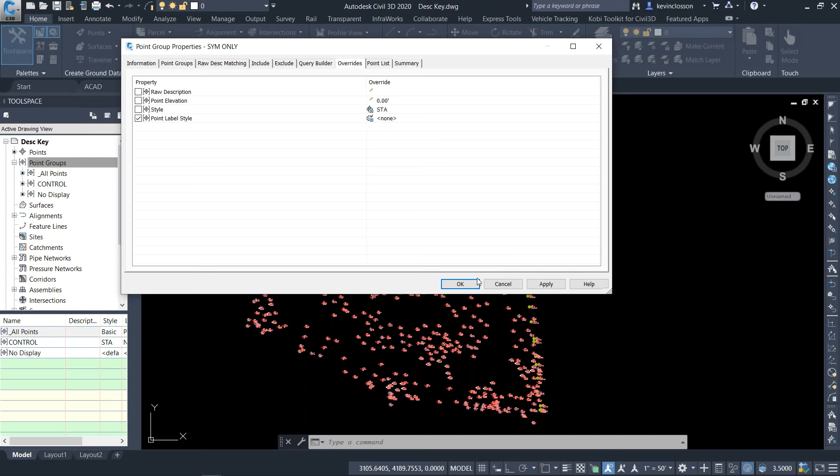And then this is an override. So if I switch to the override tab, it won't work right now because the description key file is still dictating. The last move I have to do is say override the description key file, the point label style with none. That's important. And if I OK this, you'll see several things turned off.

So my last move in this, many of the labels, it's just that point group hierarchy. Right click on point groups, and I'm going to go to the properties of that. Point groups, there's my hierarchy. I'm going to say symbols only is at the top because it was the last one I created.

I want the no display one directly underneath it. Any other point is going to be turned off. And lo and behold, there is just our symbols.

Now, I always like to do this, one last thing with this. I'm going to go to the properties, and I'm going to take that all points back up to the top so we see everything. Zing. And I'm going to do a no-no here - I don't have these locked into a database, so I'm just going to erase all those points.

The whole purpose of today is figuring out if we have everything in place up front. We've got our point groups in place. We have our description key files in place. We have our point styles behaving as they should.

And what I'm going to do is, pretending that I said brand new drawing, new, fires it right up, just like this. And we grabbed our template. Then I'll just redo that process.

Points. Oh, actually, I'll go this route. I'll say insert points from a file, and I'll go out and grab that same point file. I think we use this one here. If I'm not mistaken, let me just double check that.

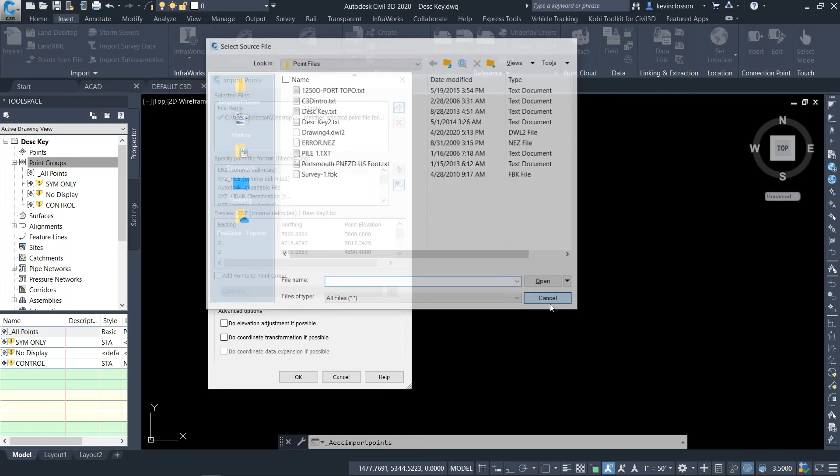I think I grabbed the right one, but just to be sure, plus description key 2. Then I want to make sure its format is correct, PNEZD, comma delimited. Everything's good. I'll say OK.

At some point, my points come back in. You can see the trees, all the other things. The shrubs are going to come in. Everything is there.

Notice that all my point groups have that, looks like a yellow home plate with an asterisk or exclamation point on it. I just have to update those. You can update them one by one, or simply right at the top, right click and say update all. Poof, now everything's updated. If it's set up correctly like this, here's the final process.

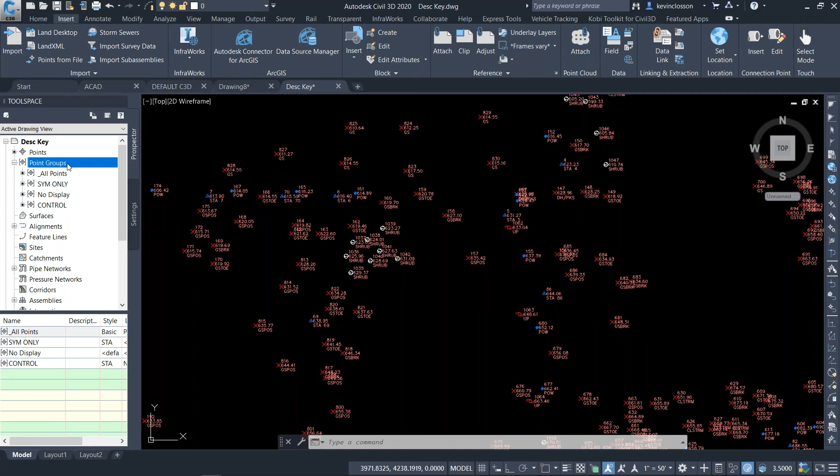Maybe I just need a quick plot. So I would just go to my point groups properties, remember at the very top, right click, brings up my hierarchy. I shoot my symbols only to the top, and I would take my no display one directly underneath that. And when we OK it, we're ready to go.

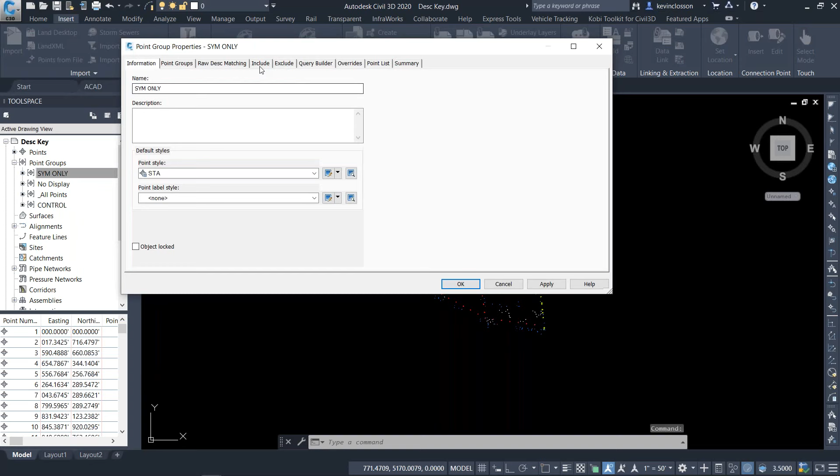If I need to add or subtract from that point group, nothing to it. You just go right click, properties of that point group, and either include data or exclude data. If I wanted to get rid of some, I could say exclude with either raw descriptions, or select them off the screen and just go grab them and they disappear.

And that's going to be in the third session for those of you that are attending. We're going to get more into the surface building and break lines and more complex surfaces.

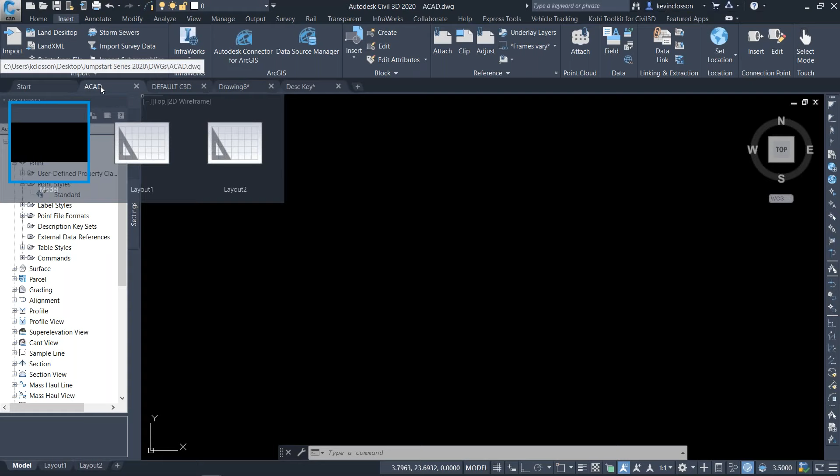So what I would do, and the way this works, is you set your drawing or your template current. There's two ways I can tell: because I switched to that tab, you can see that tab is highlighted, and also at the very top it says ACAD, same name, okay? So that's the current, or I always refer to it as the destination drawing, okay? And I want to go to this one over here called drawing 8, the description keys, where we created some.

Now, there's another way of doing this, bigger picture. I'm not sure if I'm a huge fan of it, but you can actually go to the Manage tab. As a side note, you can go to the Manage tab. Where are we at there? And over on the right, you can import styles, but it analyzes everything and brings a lot of data in. It just depends on what you want to do. My goal in here is just kind of showing project to project as things grow. As your styles grow, you might want to be bringing them somewhat onesie twosie, if you will.

So I'm going to go back, it doesn't matter, just to reiterate: that's my destination, that's at the top. The only thing I need to do when it comes to the settings tab, where all our styles are stored, is I would click where it says active drawing view, that's only my current drawing, and I'm going to say master view.

And what this does is it shows every drawing that I have open at any given time. I only use this when I'm sharing styles, by the way. I usually turn this off because it's easy to get them kind of mixed up. And what I would do then with master view is browse to the appropriate drawing. In this case it was that description key that we created, those shrubs or whatever, and I would slide on down here under points.

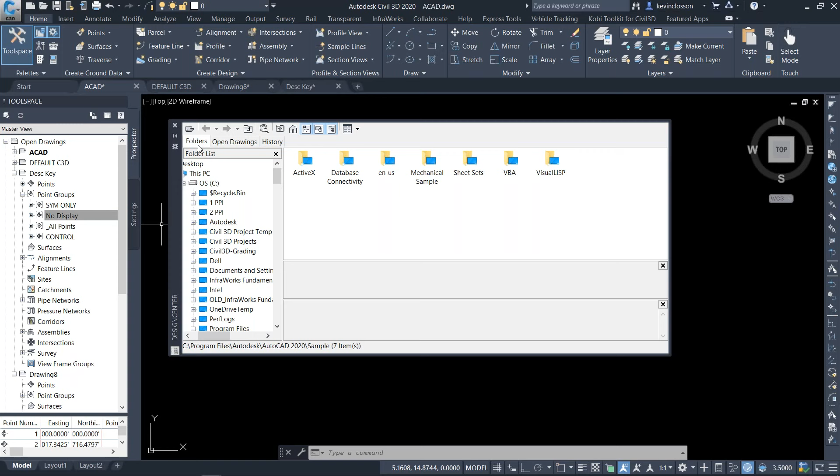So what I could do then is, there's basically three ways. There's folders, which lets me browse to a folder that has nothing to do with what we're doing, other than it has the information we want. Or I could just say show me my open drawings. Check - my current drawing is that AutoCAD. Maybe I'll go to this one called Civil 3D.

What you'll see when I highlight it there, here's all of the stuff that we can steal out of it. It's all AutoCAD stuff. It could be predefined layouts, you'll see that's in there. In this case, maybe I just want to grab a bunch of layers.

So I could click on that and drop down - I could do it this way, but if I drop this down and say show it to me in more detail. Now if we went back to this drawing, these all have predefined line types, colors, everything else. I'll just grab a handful of them - I just grabbed a whole bunch of them there. And with them highlighted like that, I just left click, hold again.

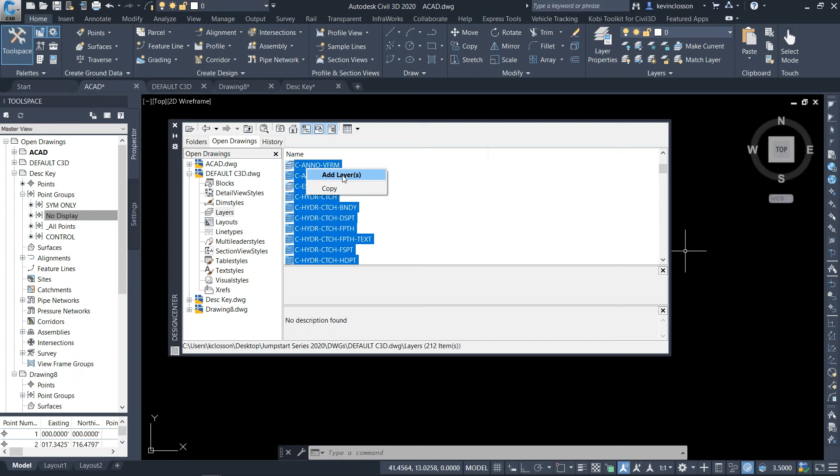Back in my new drawing - oops, did I miss some? I may have. That does work, promise. You can right click too - I could right click on it. It's not, for some reason, it's just not selecting them. But if I right click on my highlight and say add layers, it'll dump those right into it. And there they all are with the output settings.

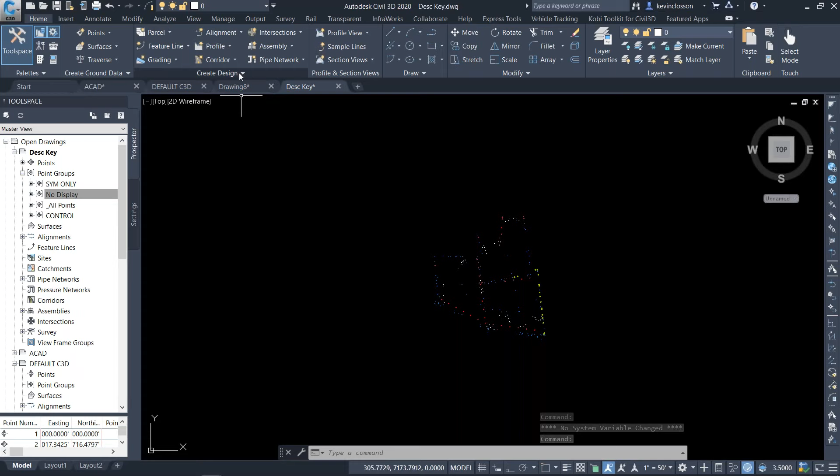Last thing I wanted to show, and this is a version of it, the template of the settings. So I'll pull up that slide here in a minute. I did throw a couple extra things in here, but everything that we talked about is in place.

We talked about under the settings tab, and this is the template that I'm going to send over. Under the settings tab, I'm going to switch this back to active, it just makes it easier.

If I right click and say edit drawing settings, the object layers are all pre-defined, which you may change. There's nothing to it - if you don't like C-dash-line or you want it to be V-align, you just click on it here and browse to whatever layer you want it to be. All the suffixes are in place with the labels on the ends. Okay, check.

Getting down now to the description key file. I'm going to switch over to my points description key sets, which I just called Jumpstart here. And if I right click and go into that for edit keys...

I put quite a few of them in here, but these are purely named Jumpstart. These are not going to be your raw descriptions. I'll switch these around here - benchmark, building, building deck, dock, bollard. I've just put a lot of very common descriptions in here.

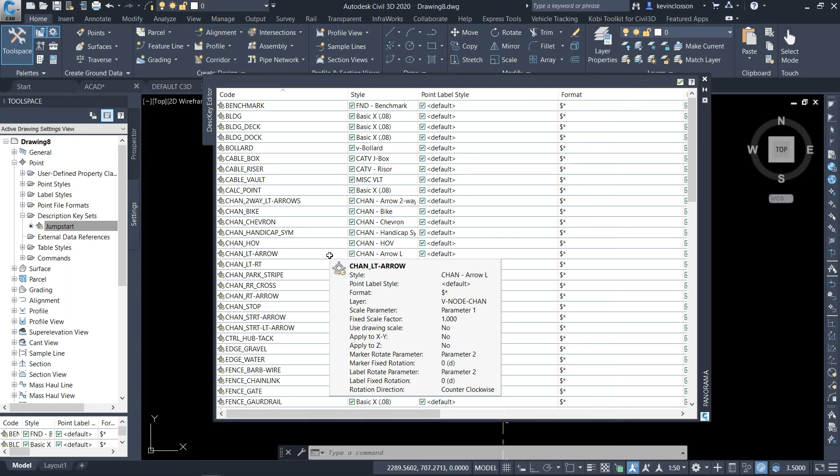However, if you don't use this at all, that's perfectly fine. But you may steal some of the blocks from it, or just take a look at how these are predefined - the description key, the point styles, the layers, all that kind of stuff - and you can reverse engineer yours from this. If you did want to try to use this, maybe you record building in the field, maybe it's not BLDG, maybe you'd click on it and say, maybe it's BD for building or something like that.

So you could just put in your own raw description. You could then slide over here - these are just the point styles that are used. You can bring in your own. And then layer-wise, I just have them all set up to the National CAD standards.

And it's not intended to be everything. It's just a good cross section of what's out there. Some people need tons more, some people need less. Ground shots, everything inside of there.

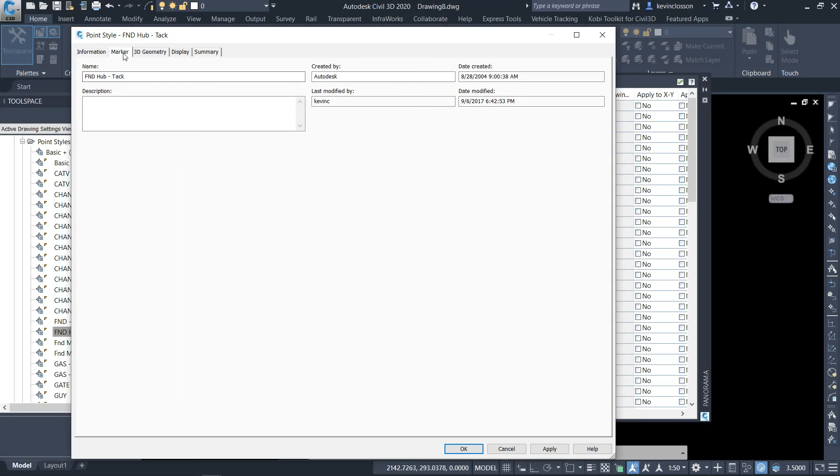Point styles - any one of these, I put a whole series of different channelizing, that kind of thing. But whatever, here's a found hub and tack. If I go inside of that, you'll notice those key settings, information tab, named, marker, I sized it accordingly, 3D geometry flattened to 0, display tab - everything is zeroed out.

It gets its layer from the description key file. Point groups are set up in there, but you'll have to tell it what your symbols only are. That's going to be dictated by how you gather your data.

Now, just for what it's worth, I've also included a ton of surface styles. If I look inside these real quick - both existing and proposed - similar to the way Autodesk does it. The difference is I've already cleaned them up. So if you go inside any one of them, notice that there's only a handful of layers.

And then I'm going to switch to that slide there. By the way, I left in alignments too, you can kind of poke through those. I wasn't expecting to show those anyway, but other than what we did there, I left some extra stuff in there, so you can take a look at that and possibly incorporate it into your environment.

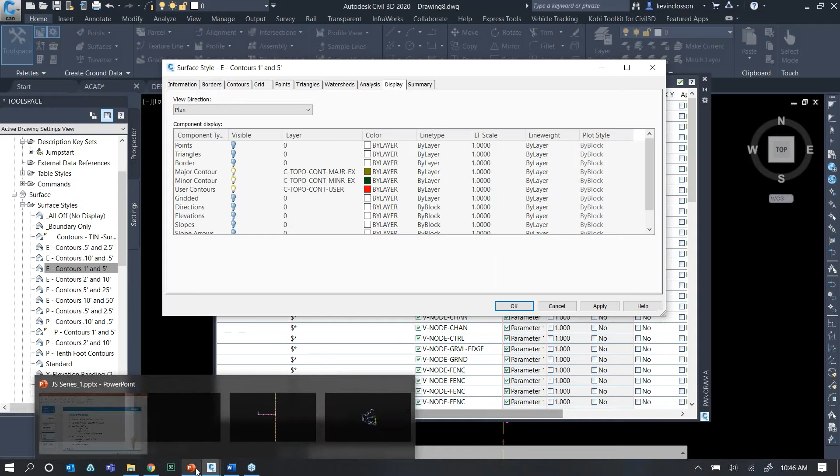So let me pull this last slide up for you, so you can hopefully see that.